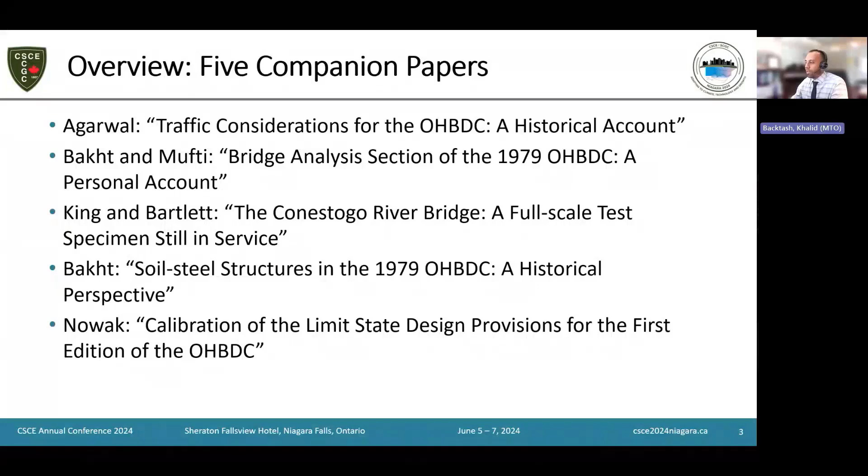Baidar Bakht is going to talk a bit about the development of the new provisions for soil steel structures in the code, and then Andy Nowak will detail the calibration of the new limit states design provision that was incorporated into the code.

Any discussion of the Ontario Highway Bridge Design Code should start with a brief description of its key proponents: Paul Csagoly and Roger Dorton, both Ontario Ministry of Transportation and Communication engineers, who served as chair and vice chair respectively of the Code Control Committee.

We were unable to find a photograph of Paul Csagoly. He came to Canada during the Hungarian uprising against the Soviet occupation in 1956 and led the MTC Structures Research Group until 1979. He eventually joined the Florida Department of Transportation and played a major role in writing AASHTO's first limit states design code, published in 1994.

Dr. Roger A. Dorton earned his bachelor and PhD degrees from the University of Nottingham. He immigrated to Canada in 1954, meeting his future wife on the transatlantic crossing. He joined P.L. Pratley's firm in Montreal, redesigning the steel cantilevers of the Champlain Bridge in Montreal, and after Pratley's death, designed the Murray MacKay Bridge across the Narrows at Halifax.

He joined the Ministry's Engineering Research and Development branch in 1972 and was promoted in 1976 to manager of the MTO Bridge Office, where he headed the development of the 3 editions of the Ontario Highway Bridge Design Code. In 1993, he returned to private consulting as head of the Ontario office of Buckland and Taylor Limited. Dr. Dorton's autobiography spanning the years is the source of a lot of what's being presented in this paper.

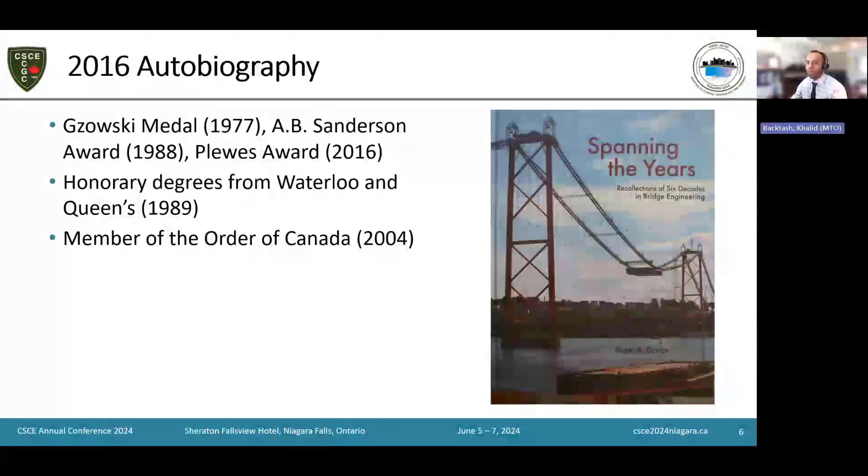As Chris alluded to earlier, Dr. Dorton identifies a perfect storm of circumstances in the mid-1970s that justified the development of a new bridge code for Ontario. There were shortcomings of the 1973 AASHTO standard specifications that were evident. The 72,000 pound, or 320 kilonewton, AASHTO design truck had roughly half the weight of the maximum truck weight permitted in Ontario, which was 140,000 pounds or 615 kilonewtons.

Moreover, the AASHTO and CSA S6 standards did not have commentaries. The procedures for revising AASHTO required support from all 50 states, which would have been challenging to receive. The metric system was being adopted in Canada, but AASHTO had no plans to metricate. The early 1970s also saw the dawn of limit states design in Canada, and the creation of a limit states design code would allow proper calibration to be conducted.

Finally, the ministry was spending $250,000 a year on research and was making significant inroads concerning a new live load model, load factor design, dynamic analysis, and deck design considering membrane forces. Practitioners were unlikely to take advantage of these new findings unless all of these provisions were permitted by a formal design code.

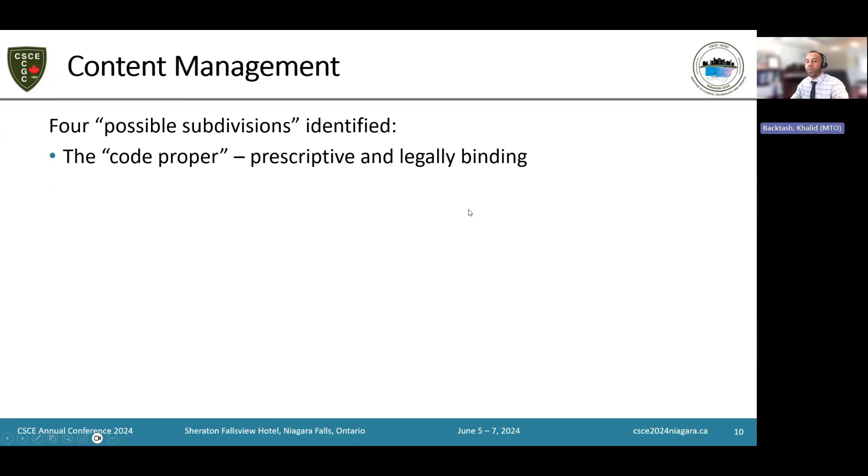4 possible categories of content were identified: the code proper, which was prescriptive and legally binding; charts or diagrams in appendices, legally binding; a commentary published with the code but not legally binding; and then a supplement of background data of research information published with the code but not legally binding.

The first edition of the OHBDC was used to design new bridges owned by the province of Ontario. Practitioners at the time observed that its use increased design time by 30%.

The second edition was issued in 1983 and made mandatory for the design and evaluation of all bridges in 1984. The third edition was issued in 1993. Then the first edition of the Canadian Highway Bridge Design Code, based on the 93 edition of the OHBDC, with existing bridge evaluation provisions from previous editions of CSA S6, was introduced.

The Code Control Committee was chaired by Paul Csagoly with Roger Dorton as vice chair. Here I will highlight some of those Code Control Committee members.

Chris G. Bassey was an engineer at the MTC Bridge Office and also chaired the Pre-Stressed Concrete Subcommittee. Barrington deV. Batchelor taught civil engineering at Queen's and chaired the Deck Slab Subcommittee. Jacques Bouchamp was director of Bridge Engineering for Public Works Canada. Chester Grebsky was an MTC engineer who also chaired the General Features of Design Subcommittee.

Roger Green taught civil engineering at Waterloo and chaired the Dynamic Loads and Vibration Subcommittee. DJ Laurie Kennedy taught at the University of Alberta and chaired the Steel Design Subcommittee. Kenneth Kleinbasser was an MTC engineer who chaired the Evaluation of Existing Bridges Subcommittee. Brian Richardson was an MTC engineer who led the Miscellaneous Loads and Movements Subcommittee, and Ronald A. Temple was also a member of the Code Control Committee.

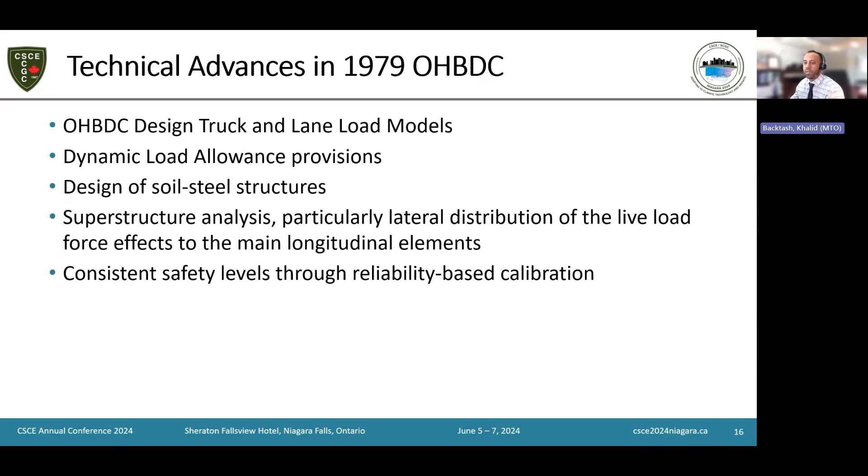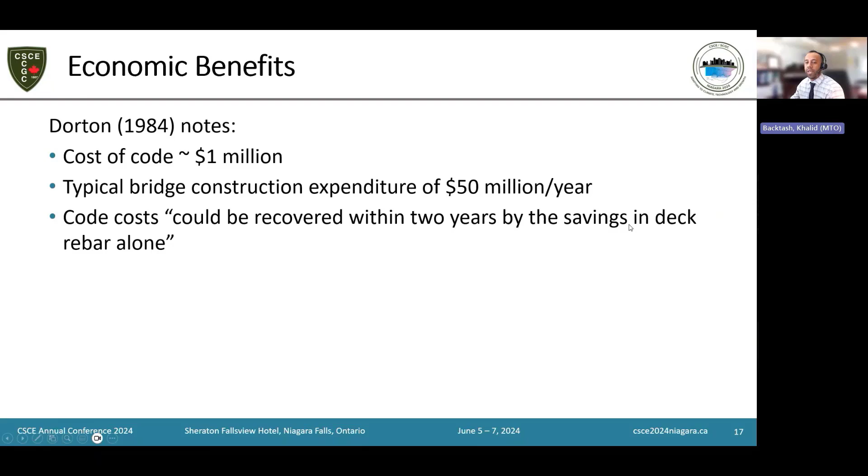In 1984, in a paper, Roger Dorton notes that the cost of developing the code at the time the second edition became mandatory in 1984 was about $1 million. He also estimated that given typical bridge construction expenditure at the time was about $50 million per year, the code could have recovered the cost being spent in about 2 years in savings in deck rebar alone.

He also concludes that perhaps the largest financial benefit, however, is in the area of bridge evaluation, where the new code will enable many bridges to be saved and renovated that would have been replaced at greater expense under the old code provisions. The other major benefit, difficult to measure in financial terms, is the provision of bridges of a much more consistent and well-defined safety level, capable of carrying design live loads twice those previously described. That's all for the brief introduction.

Our next speaker is Akhilesh Agarwal, who retired from a long career as principal research engineer with the MTO's Research and Development Branch. Akhilesh chaired the Dead and Live Loads and Load Factor Subcommittee, responsible for Section 3 of the 1979 Ontario Highway Bridge Design Code. He subsequently served as the first chair of the Calibration Task Force of the Canadian Highway Bridge Design Code. His expertise in traffic load modeling and bridge evaluation has had a lasting impact on transportation infrastructure across the country. His presentation is on Traffic Considerations for OHBDC, a Historical Account.

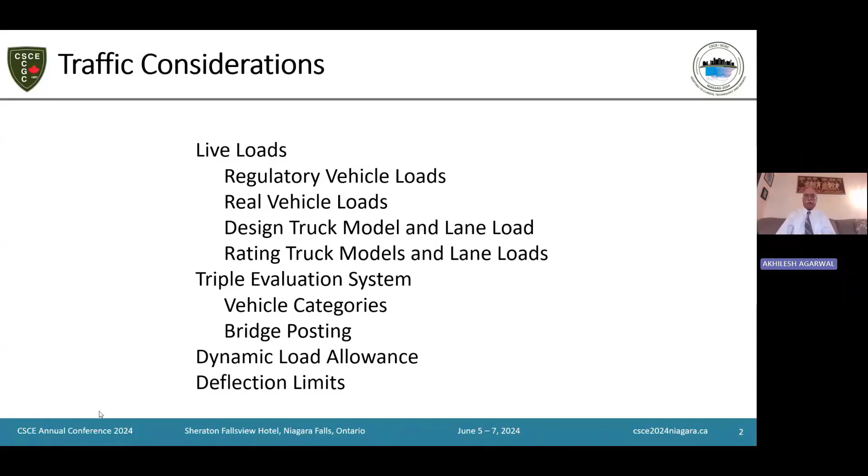Regulatory loads are determined on the basis of capacity of the highway and such infrastructure, with appropriate margin of safety to accommodate occasional overloads. Real vehicle loads can be established through province-wide load surveys. The design truck model, lane load, and evaluation loads are developed based on the real loads that go on the roads. A triple evaluation system addresses three different categories of vehicles and corresponding bridge posting loads. Traffic considerations also go into dynamic load allowance and deflection limits.

This is a story of the time when we had no personal computers. The bridges were evaluated and designed using hand calculations with a calculator. In hand calculations, it's quite difficult to analyze for a moving set of point loads, a moving set of axle loads, or a moving truck on a variety of different bridges.

But it's a lot easier to analyze bridges for uniform distributed loads. So in Ontario, vehicle trains were introduced in 1965, but they were not addressed in the AASHTO code that was in use in Ontario at that time. So when we were asked what kind of load should be allowed in these vehicle trains, to analyze a variety of bridges and a variety of bridge configurations for a variety of truckloads was almost an impossible exercise.

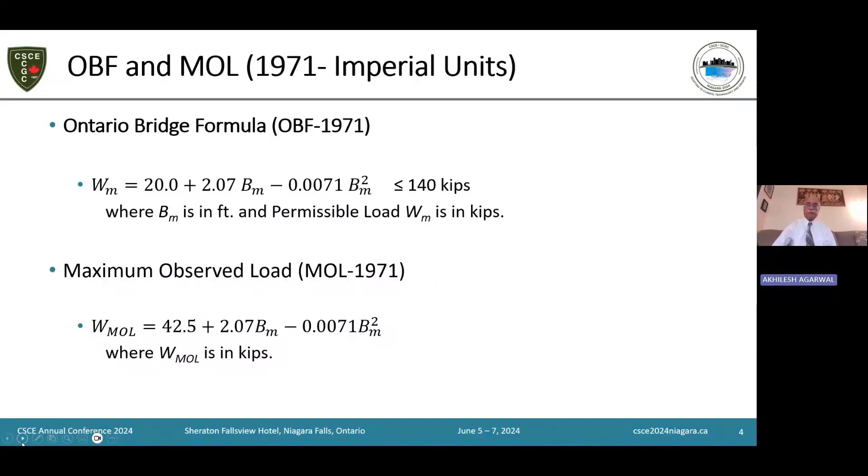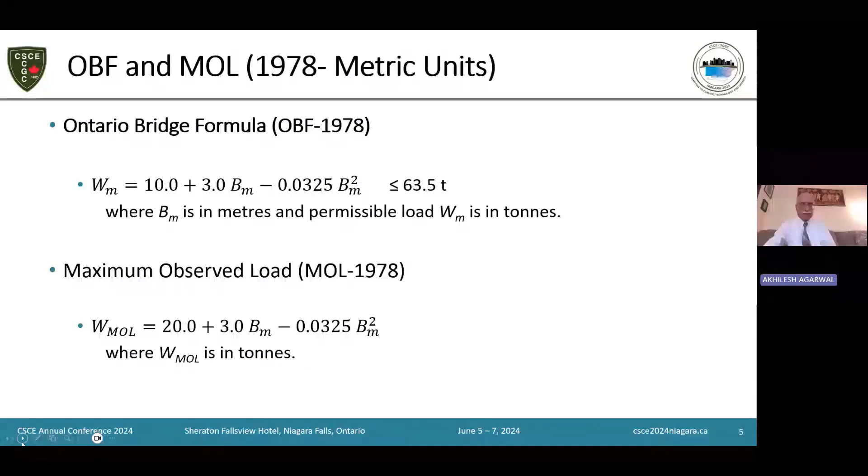In 1978, the metric system came to Ontario. The pavement engineers agreed to increase the allowable load on a single axle to 10 metric tons. The Ontario bridge formula was modified, and assuming that the nature of overload would remain similar after metrication, the maximum observed load level was obtained by adding 10 metric tons to the Ontario bridge formula. Another survey was conducted in 1975, which further confirmed the maximum observed load level. The survey also indicated that vehicles can be divided into three categories: Category 1 for single unit vehicles, also known as straight trucks in the industry, Category 2 tractor trailers or tractor semi-trailers, and Category 3 trains.

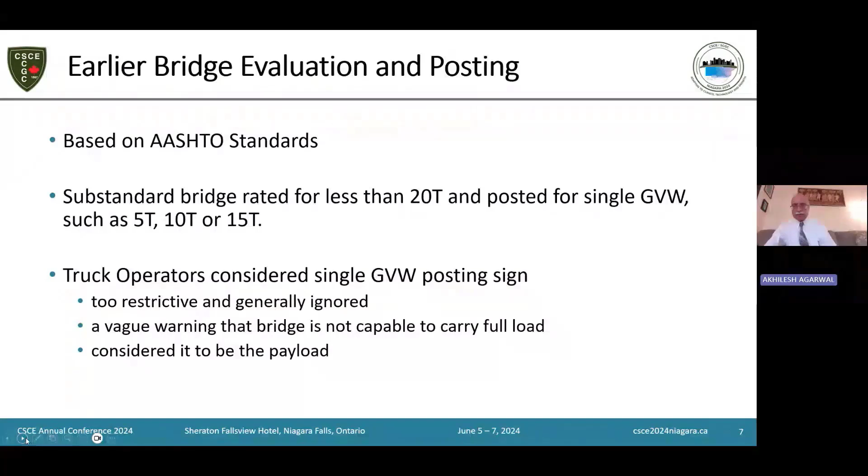Earlier bridge evaluations in Ontario were based on AASHTO standards, and according to this evaluation process, substandard bridges were rated for less than 20 tons, and they were posted for a single gross vehicle weight, such as 5 tons, 10 tons, or 15 tons, at the bridge site. Truck operators considered these signs to be too restrictive, and they generally ignored them. We ourselves have observed some 40-ton trucks crossing a bridge with a 5-ton sign on it. The truck operators also felt that they were just a vague warning that the bridge is not capable of carrying full load. And some even considered that it was not the gross weight of the vehicle, but the payload, the amount of load that is put on the empty truck. So there was wide confusion, and the signs were ignored quite frequently.

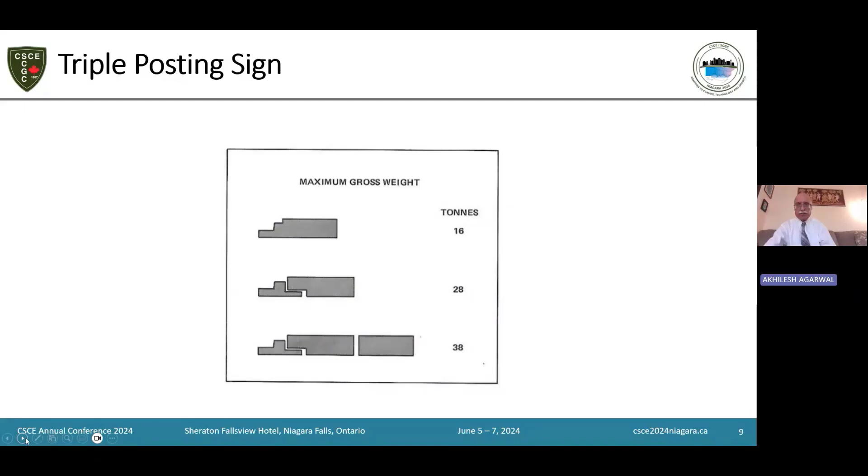So we decided that bridges need to be evaluated for each vehicle category separately, and that a substandard bridge should be posted with a gross weight limit for each vehicle category. For this, we now needed live load models for each vehicle category. The triple posting sign, which you can see today on a lot of bridges, shows 3 different categories of vehicle and the maximum allowable load on each category.

It was decided to develop a loading model such that its subconfigurations could be used for evaluation loads. And that led to this OHBD 5-axle truck, in which axles 2 and 3 represent a dual or triple axle unit. The first 3 axles would represent category 1 vehicles, the 4 axles would represent category 2 vehicles, and the full OHBD truck would represent category 3 vehicles.

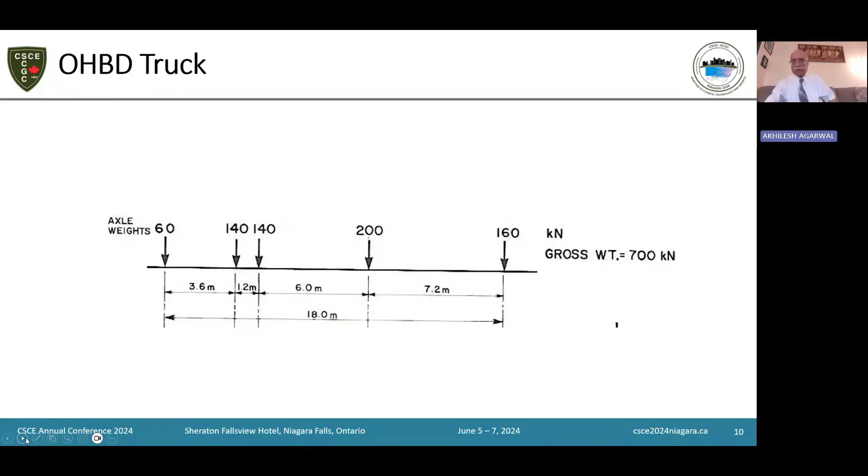To represent the other miscellaneous traffic, a lane load was developed, in which other miscellaneous traffic was represented by a uniform distributed load. The intensity of this load depended upon the highway class, A with the higher volume classes and B and C with the lower volume classes.

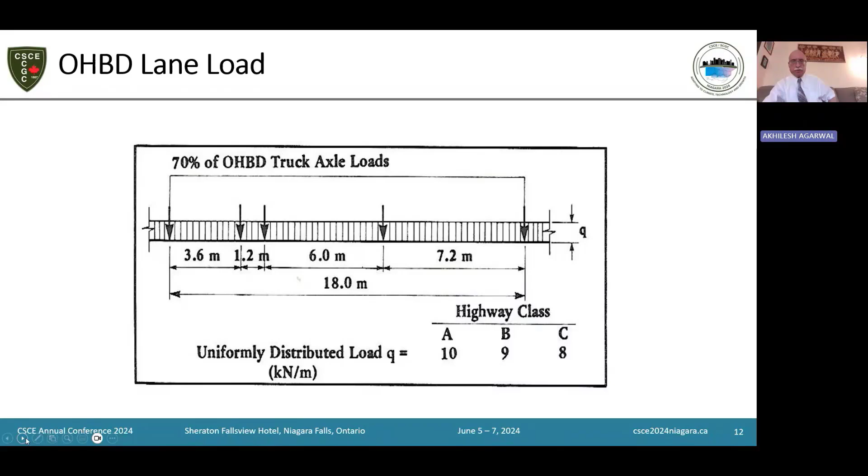For design convenience, the uniform distributed load was placed on the entire length, and therefore it was overlapping over the truck. To compensate for that, the truck loads were reduced to 70% of the OHBD truck axle loads.

For evaluation purposes, the Ontario Highway rating trucks for 3 categories were, as I mentioned earlier, the first 3 axles of the OHBD truck made the evaluation level 1 load, 4 axles made evaluation level 2 load, and the full OHBD truck made the evaluation level 3 load. There were corresponding lane loads, again in a similar way as design.

Coming to dynamic loads, prior to the Ontario Bridge Code, there was a general feeling that you don't have any resonance with the vehicle loads on the bridges. But this all changed in 1972, when we were out to test a bridge in St. Jacobs, Ontario. It is in the middle of the town. We went there to do the punching shear test on the bridge.

And as we were preparing for the testing, instrumenting the bridge and all that, I walked on the walkway on the outside of the truss, just to have a look at the truss condition. And when I was around the middle of the span, suddenly the bridge started shaking very badly. And I just could not understand why it was shaking so badly. I looked and there was only a horse buggy on the bridge at that time.

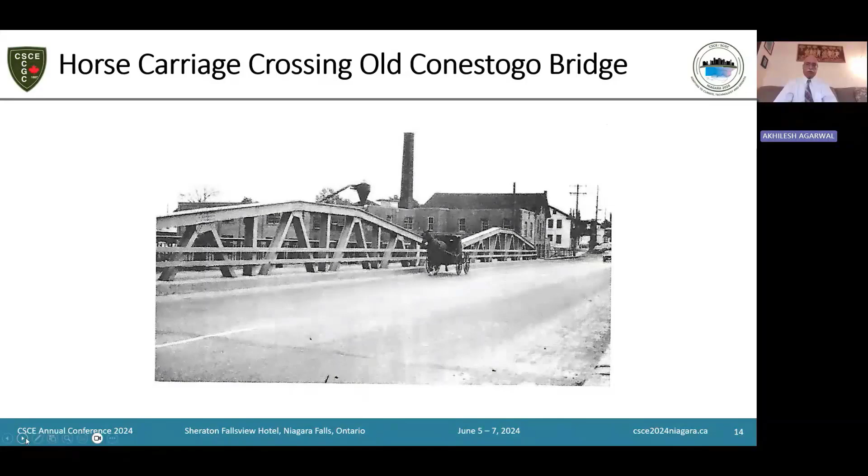So we instrumented the bridge to measure dynamic deflections at mid-span. We measured the dynamic deflection under a heavy truck, and what we found was that the dynamic deflection under a lightweight horse buggy was almost as large as under a heavy truck. The frequency of the horse's hooves was around 3 hertz. So we concluded that there was some kind of a resonance situation developing between the horse buggy and the bridge. The resonance frequency may be close to 3 hertz.

So we later on selected a number of bridges. And first we got some data from industry. We found that the natural frequency of the springs for trucks is generally from 2.5 to 5 hertz. So we selected a number of bridges which had natural frequencies in the range of 2.5 to 5 hertz and carried out extensive dynamic deflection measurements. And from that, we determined the dynamic load due to normal traffic.

And we found that, generally speaking, the impact values in those bridges were a lot higher than what the code was providing. For bridges outside this range, we found that the impact value was quite low. This gave us an idea that in order to avoid high dynamic loads, it's preferable to design new bridges outside the natural frequency range of 2 to 5. But if there are bridges between 2 and 5, they should be designed for a higher dynamic load allowance.

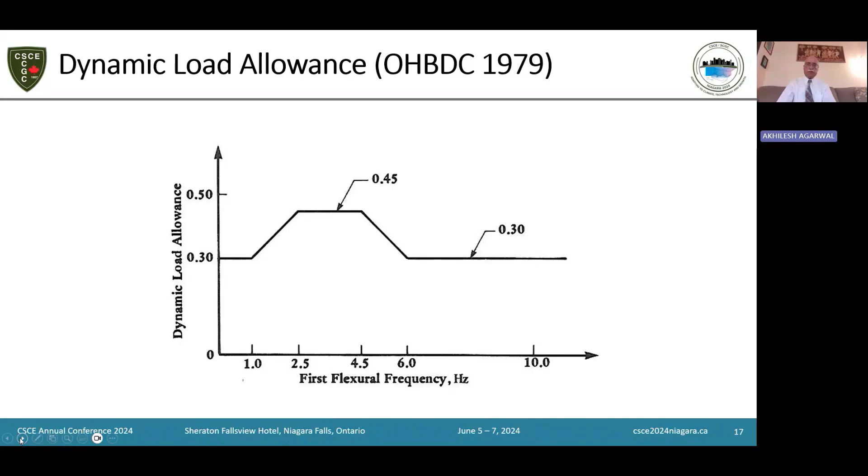That led to this provision in the Ontario Highway Bridge Design Code, where for bridges with natural frequency less than 1 and more than 6, it is 0.3. For 2.5 to 4.5, the dynamic load allowance is 0.45, gradually reducing to 0.3 on both sides. This became part of the dynamic load allowance in the Ontario Highway Bridge Design Code.

Traffic considerations also were considered for deflection limits. In AASHTO, they were empirical deflection limits, but we rationalized them on the basis of human perception of bridge vibrations. People who are traveling in vehicles don't experience any bridge vibration. But people who are walking on the bridge feel somewhat less bridge vibration compared to people who would be sitting on the bridge. And this led to 3 different conditions for the deflection limits.

For bridges without sidewalks, such as expressways, where you may have only occasional maintenance people on the bridge to experience bridge vibrations. Then bridges with somewhat less pedestrian use, and then bridges with significant pedestrian use, such as with sidewalks within towns or cities. That led to this chart of all the deflection limits, which became part of the Ontario Highway Bridge Design Code.

Subsequently, the dynamic load allowance has been changed in the further editions of the Ontario Bridge Design Code and into the CHBDC. Also, the load model for the Canadian Highway Bridge Design Code subsequently has been developed not at the maximum axle load, but at the regulatory load limit for interprovincial transportation, which is commonly known as Council of Ministers loading.

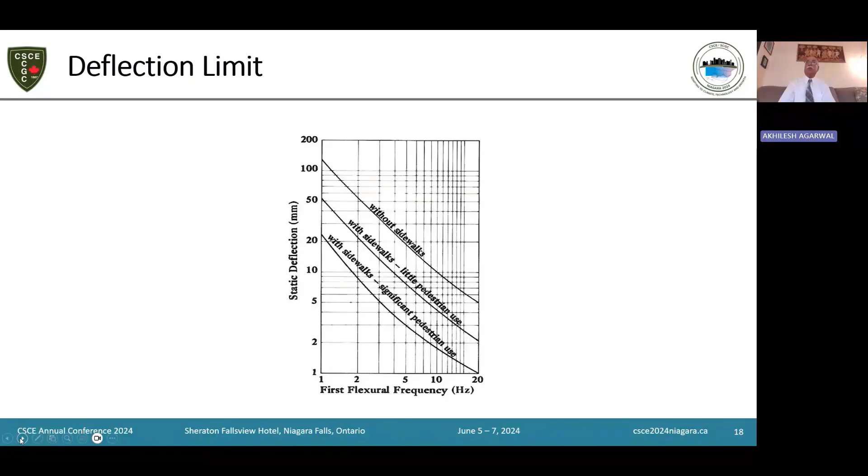Thank you. Our third speaker is Baidar Bakht, who also retired from a long career as principal research engineer with the MTO's Research and Development branch. Baidar worked extensively with Leslie G. Jaeger, chair of the Section 5 Subcommittee on Static Analysis of Bridge Superstructures of the OHBDC First Edition. He subsequently won the Ontario Professional Engineers Engineering Medal in 1997.

In 2014, he was appointed a member of the Order of Canada for his contributions to civil engineering and cultural enrichment through Urdu and Hindi poetry. Baidar's presentation is titled Bridge Analysis Section of the 1979 OHBDC, A Personal Account.

I would like to relate my experience to the analysis section of the OHBDC through a personal account that I'm going to recount with my friend Aftab Mufti, who is an emeritus professor at the University of Manitoba, now living in BC. I was in England from 1966 to 1973, working with the Ministry of Transportation of UK. And I also did my master's at the Imperial College.

I learned that bridge superstructures were analyzed for transverse load distribution by either manual or computer-based methods. The computer-based methods were grillage analogy, finite element method, orthotropic plate method, and the manual methods were distribution coefficient methods developed by Guyon and Massonnet and adopted by Cement and Concrete Association. There were also methods developed by Cusens and Pama.

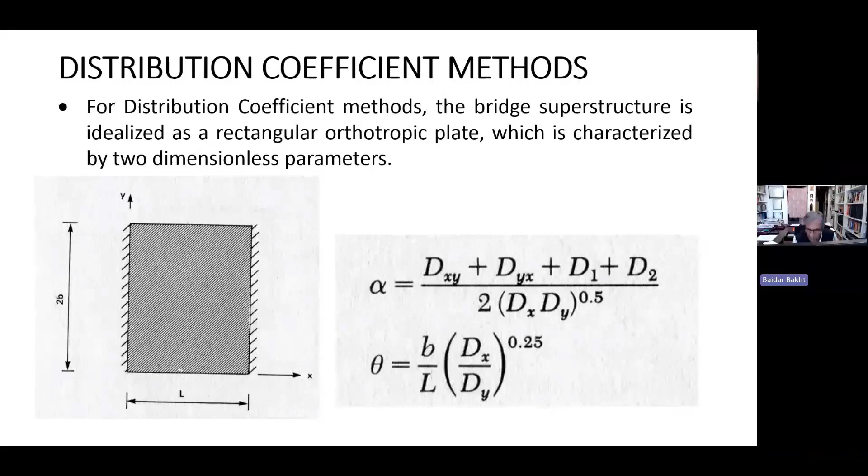For distribution coefficient methods, the bridge structure is idealized as a rectangular orthotropic plate, and it is characterized by two very important dimensionless parameters, alpha and theta. Alpha relates the torsional rigidities Dxy, Dyx, D1 and D2 with the flexural rigidities of the bridge, and theta relates the longitudinal flexural rigidity, which is Dx, with the transverse flexural rigidity of the bridge along with its aspect ratio, which is half width of the bridge b and the span of the bridge. They are very important characterizing parameters.

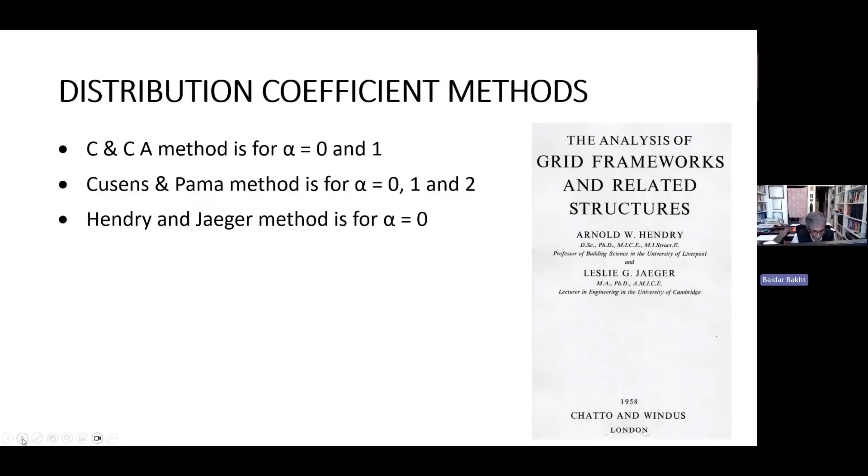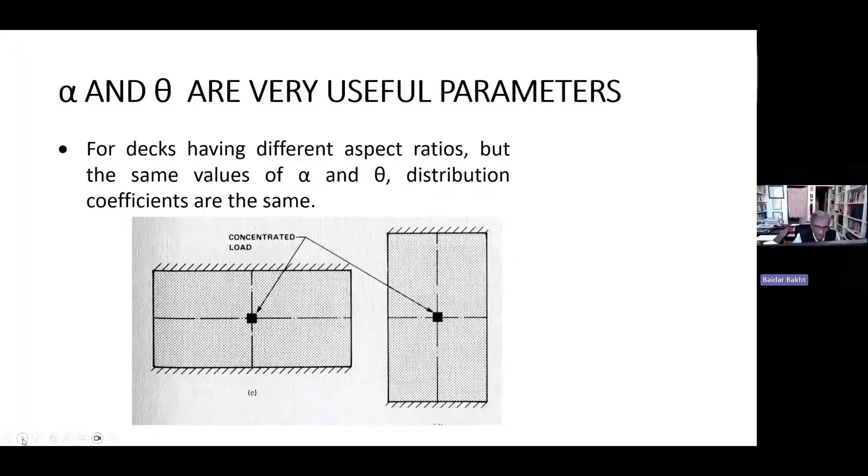Now, alpha and theta are very useful parameters. If you take two rectangular orthotropic plates, one is twice as wide as the other, but have the same values of alpha and theta, the distribution coefficients across any transverse cross-section will be exactly the same. Now, alpha and theta are very useful in that theta for all bridges in the world goes from nearly 0 to 2.5. Now, alpha goes from nearly 0 to 2.

Alpha from nearly 0 to nearly 0.02 has bridges with very little torsional rigidities, and these are timber bridges. Slab and girder bridges have alpha nearly equal to 0.1. Slab bridges have alpha equal to 1, and box girder bridges, in which the torsional rigidity is very large, have alpha between 1.5 and 2.

In 1973, I came to Canada and joined the Ministry of Transportation and Communication and found that bridges are analyzed only as beams by a very simple method of analysis. What you do is, if you have a girder bridge, you isolate one girder of the bridge, subject it to 1/2 of the design truck multiplied by S over D, where S is the girder spacing and D for steel girder bridges is 5.5 feet.

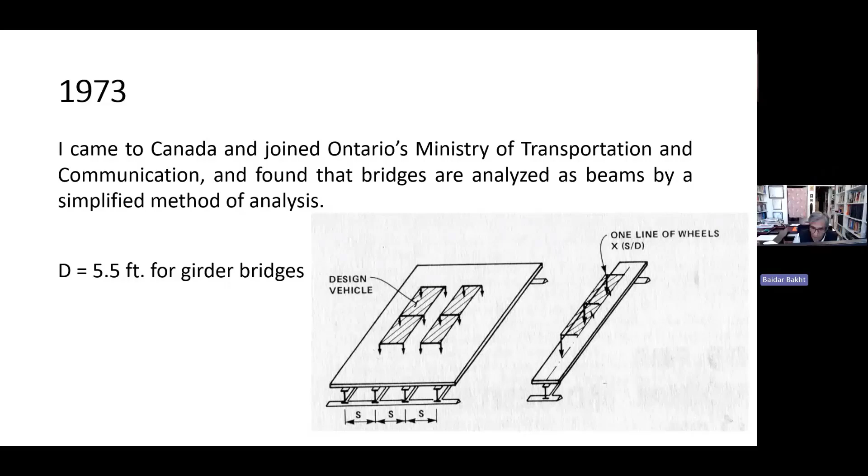That was very simple. So it was a huge change for me for analysis of bridges from the complex methods used in the UK and rest of Europe to very simple methods used in Canada and USA. The OHBDC was launched in 1976, and it was the first bridge design code in the world which had a method of analysis. Leslie Jaeger of the Hendry and Jaeger method, he was a professor at McGill University.

He was invited to chair this section. Now, I had read Leslie Jaeger's book, besides the one I showed you on Cartesian tensors in engineering science, and theory of elastic plates, and I was an admirer of his work.

In 1976, Leslie Jaeger moved from McGill to Acadia University, where he was the vice president, and I met his friend Aftab Mufti, who was the head of computer science at Acadia University. Aftab was not a member of the OHBDC, but he contributed indirectly to the analysis section. The three of us, Les Jaeger, Aftab Mufti, and I, did a lot of work on methods of analysis.

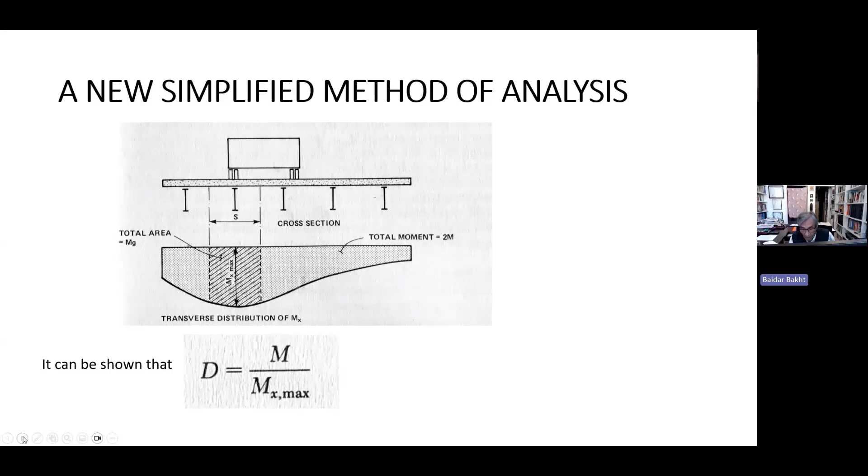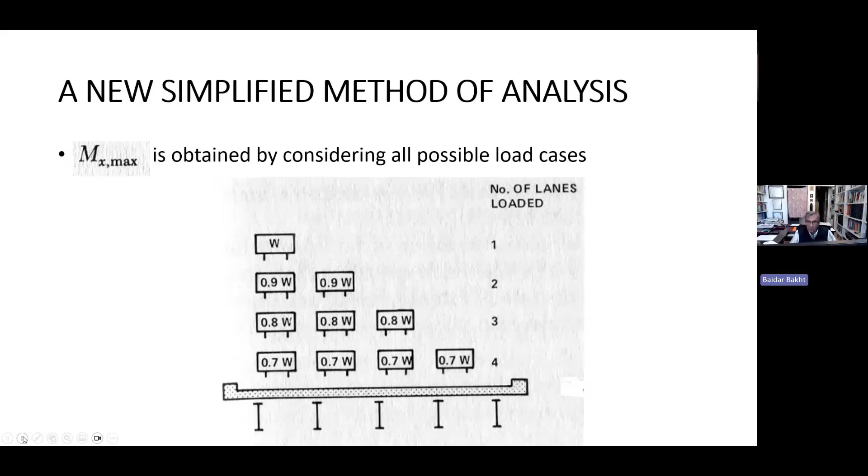For any bridge, we can calculate the value of D and then use the AASHTO method for analyzing the bridge as a one-dimensional beam. We took, for example, a 4-girder bridge, which had 4 load cases. We analyzed this bridge under all 4 load cases, multiplying the weight by the modification factor, which was 0.9 for 2 vehicles, 0.7 for 4 vehicles, calculated the value of mx max for each, calculated the D value for each, and then we used that alpha theta space for plotting the values of D for bridges with different number of lanes.

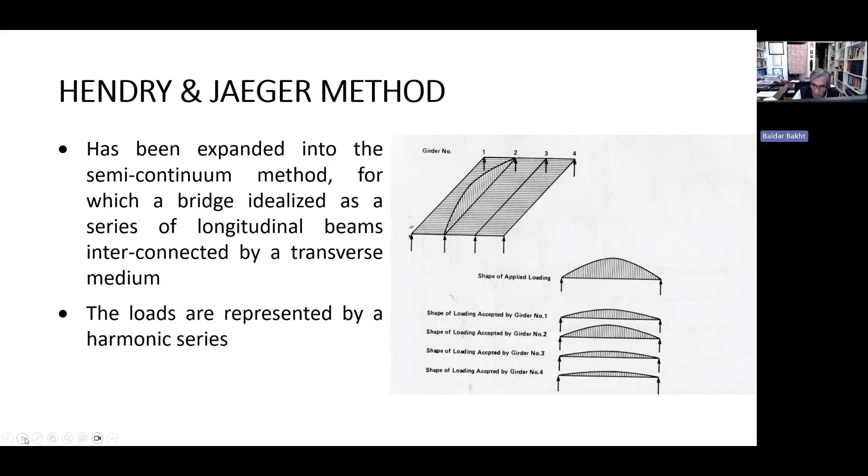But if you have the first harmonic of any loading, it looks like a half sine curve. And the beauty of that loading is that if you apply that loading to any girder of a bridge, all the other girders receive the same shape of loading. So it's very easy to calculate the distribution coefficient for a loading represented by harmonics.

Hendry and Jaeger had analyzed bridges with zero torsional rigidity, which means alpha is equal to 0, because in those pre-computer days, it was not feasible to include the torsional rigidities and have a very large number of equations. When Leslie Jaeger met me, the computers had come in vogue, and we revived the semi-continuum method by taking into account the torsional rigidities in both the longitudinal and transverse directions. The method is incorporated in a computer program called SECAN and is detailed in this book, which was also published by McGraw-Hill in 1989.

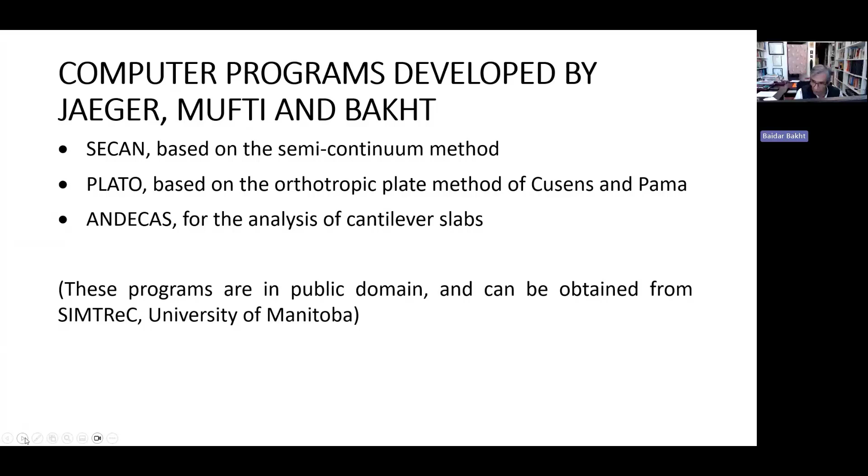Leslie Jaeger, Aftab Mufti, and I have written 3 major programs. One is SECAN, which is based on the semi-continuum analysis, PLATO, which is based on the orthotropic plate method of Cusens and Pama, and ANDECAS, which is for the analysis of cantilever slabs of slab and girder bridges. These 3 programs are in the public domain and can be obtained from SIMTReC, University of Manitoba. Leslie Gordon Jaeger passed away in 2013. He's the only fellow that I know who has 2 earned doctorates and 2 honorary doctorates.

I miss him very much, and we had a very good career doing research together.

Thank you very much. Our fourth speaker is Mike Bartlett, Professor Emeritus of Structural Engineering at Western and the immediate past chair of the CSCE National History Committee. Mike led the initiative to have the Conestoga River Bridge near St. Jacobs designated as a CSCE National Historic Site. The graduate students he has supervised at Western have largely done highway bridge-related research, primarily on the assessment and rehabilitation of existing bridges, and he has won CSCE's Pratley Award 5 times. He will be speaking on the Conestoga River Bridge, a full-scale test specimen still in service.

Good morning. I'd like to start by warmly acknowledging my co-author, Peter King, of Western's Boundary Layer Wind Tunnel. My presentation is basically 5 pieces. We'll start with an introduction and a little bit of background on the need for the bridge. We'll review the design and construction of the bridge and the research conducted using the bridge. And finally, reflect upon the historical significance of the bridge.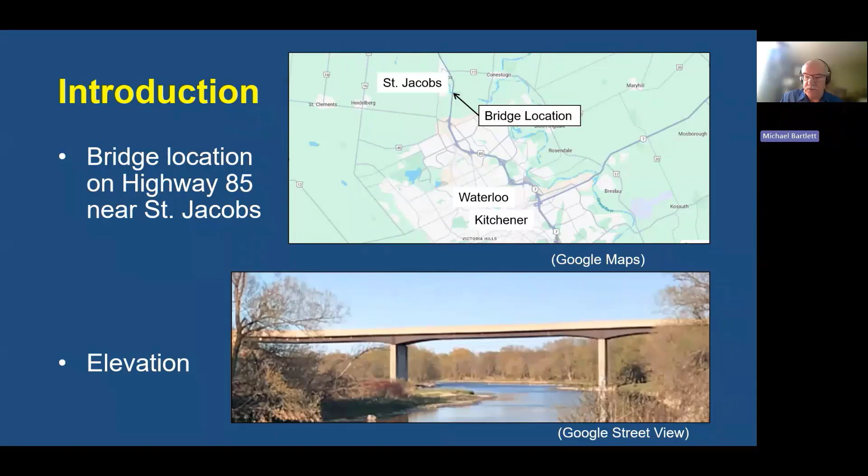The bridge represents the culmination of intensive research activity by the Engineering Research and Development Branch, ERDB, of the Ontario Ministry of Transportation and Communications. According to Roger Dorton, the group was, quote, small but had a surprisingly large number of significant projects underway.

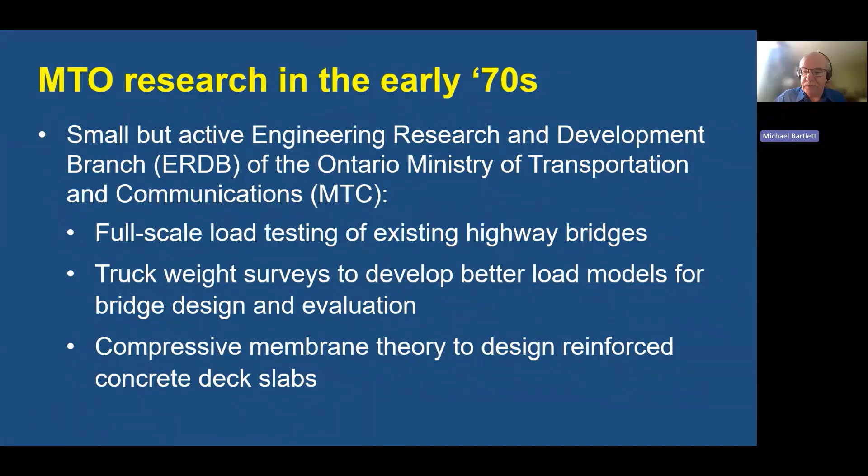Its activities included checking the load-carrying capacities of bridges thought to be deficient using full-scale load testing, carrying out truck weight surveys, Akilish has talked about them already, to develop more accurate truckload models for bridge design and evaluation, and investigating the application of compressive membrane theory to design reinforced concrete deck slabs that require a fraction of the reinforcement needed for conventional designs of the day. Khaled reminded us of Roger Dorton's observation that the cost of developing the OHBDC was saved with the savings of 2 years in deck reinforcement.

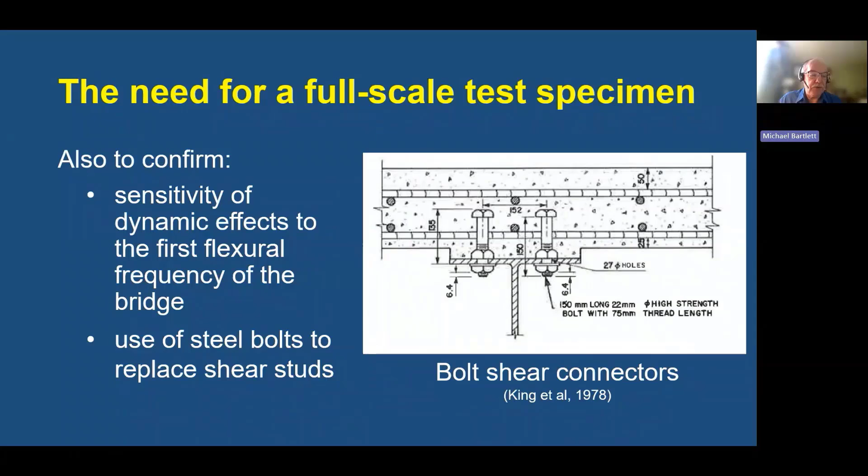They recognized that they needed a full-scale test specimen to confirm their findings and also to confirm the dynamic effects of the traffic loads being sensitive to the first flexural frequency of the bridge. Again, Akilish has talked about the buggy crossing the Conestogo River Bridge. And to verify that steel bolts could be used to replace shear studs to achieve fully composite behavior of steel-concrete bridge superstructures.

Roger Dorton's autobiography celebrates the support received from the ministry's senior bureaucrats. Quote, the senior management became very interested in the Conestogo River Bridge project, and rightly so, as they would be held responsible for the opening for public use of a bridge with many innovations that was not designed to the accepted code. Without this high-level support, Dorton says, this unusual project would never have been realized. They showed a forward-looking acceptance of risk and change, characteristics not always associated by the public with civil servants.

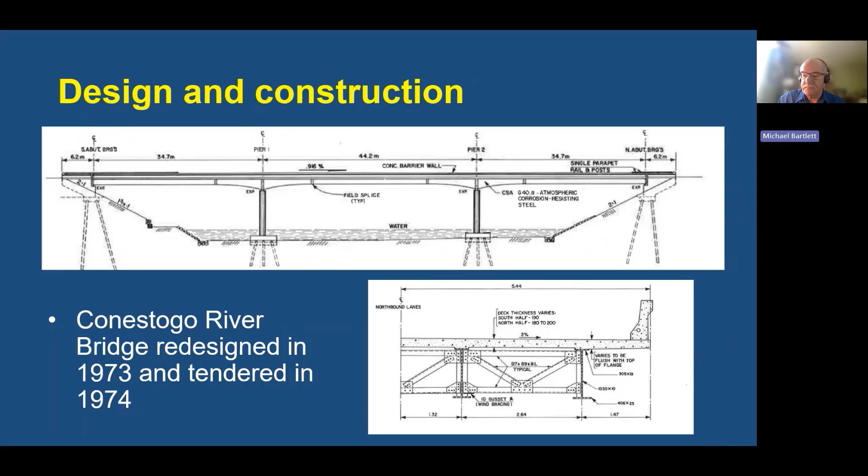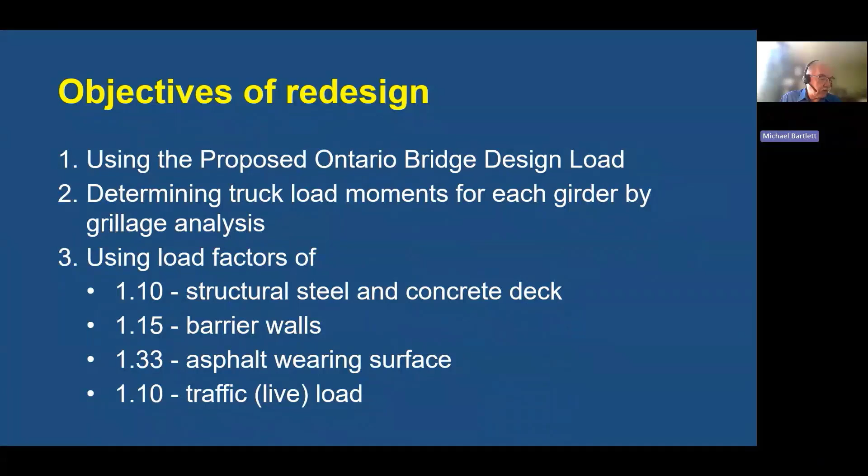The redesign had several objectives. First, to use a new load model, the proposed Ontario Bridge Design Load, proposed by Csagoly and Dorton in 1973, determining the fractions of truckload moments carried by each girder by a computerized grillage analysis that yielded much smaller girder demands compared to those obtained using the AASHTO 1973 specifications. Using distinct dead load factors of 1.1 for the structural steel and the concrete deck, 1.15 for the barrier walls, 1.33 for the asphalt wearing surface, and a very low live load factor of 1.1 because the specified proposed Ontario Bridge Design Load represented an upper bound vehicle weight.

They eliminated any deflection limitation to allow a very shallow and flexible superstructure. It was intended that the first flexural frequency lie outside the range of 2 to 5 hertz. Akilish has told us why that's important, that it's typical of heavy truck frequencies. This would prevent resonance between the truck and the bridge and so markedly reduce the dynamic effect of the live load. They used ASTM A325 bolts as shear connectors instead of conventional welded shear studs.

They used a conventional deck slab designed to resist transverse bending by the usual AASHTO 1973 working stress method for the south half of the bridge, but they created 12 test panels at the north half with thicknesses of 180, 190, and 203 millimeters, and transverse steel percentages of 0.95%, which was the AASHTO requirement, 0.6, 0.3, and 0.2%.

And finally, they post-tensioned the deck longitudinally to satisfy allowable tensile stress limits at ultimate limit states and ensure composite behavior in the negative moment regions.

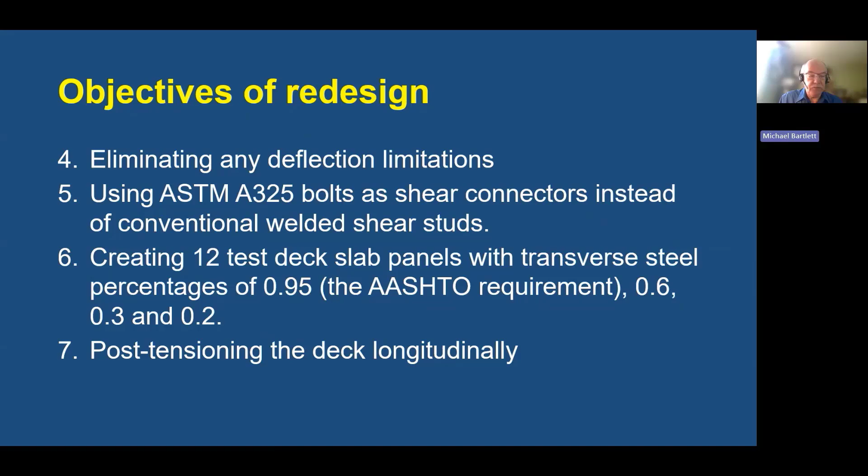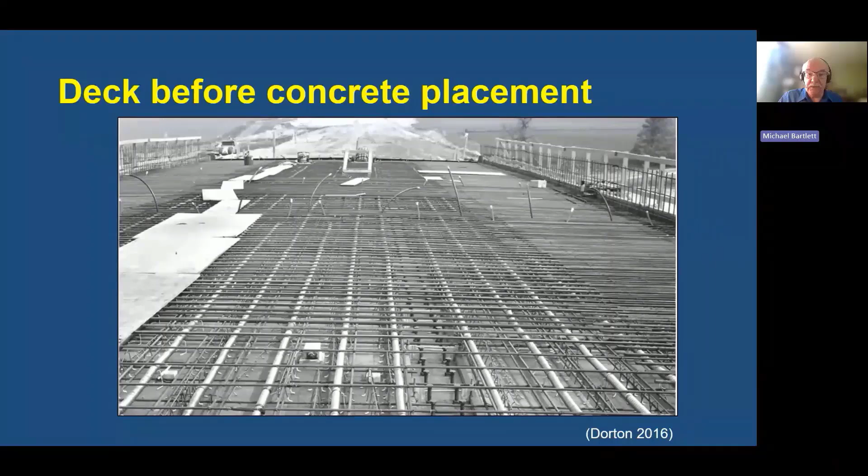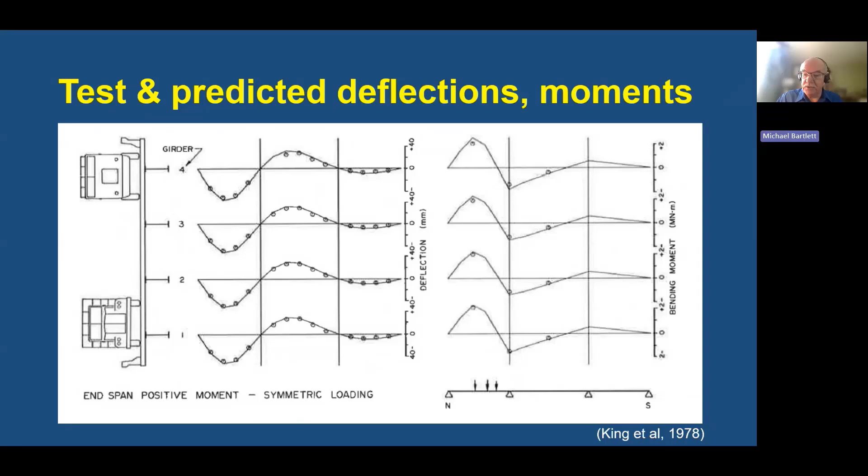This figure shows the stress distributions in the girders inferred from the strain gauge readings. In all cases, the observed location of the neutral axis corresponds closely to that computed for the fully composite section and well above that computed for the non-composite section. The bolt shear connectors are clearly effective.

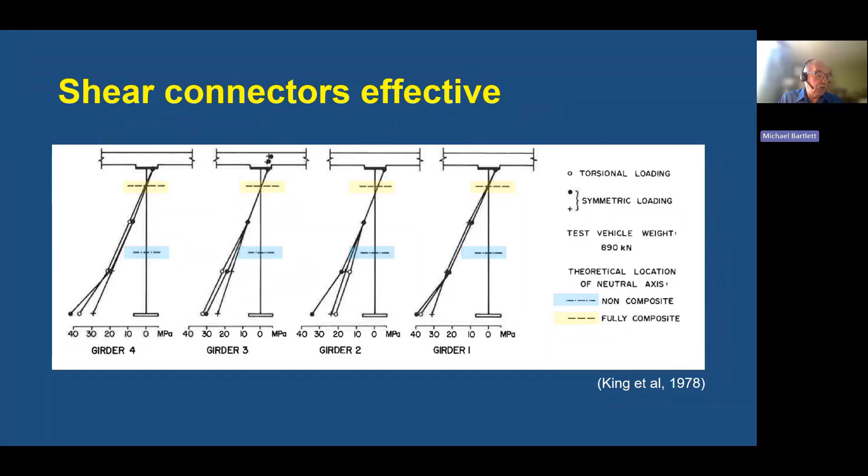The test deck sections performed very well, even though the transverse reinforcement was as low as approximately 1/5 of that required by the AASHTO 1973 provisions.

The Conestogo River Bridge is historically significant because it's novel. It's the only one that we're aware of that was designed using unpublished design standards to be used as a test specimen before being put into regular service. It's also significant because of its creators. The MTO Engineering Structures Research Branch, although small, was carrying out substantial and world-leading research that had a tremendous and lasting impact on bridge design in Canada and, as Chris pointed out, even internationally.

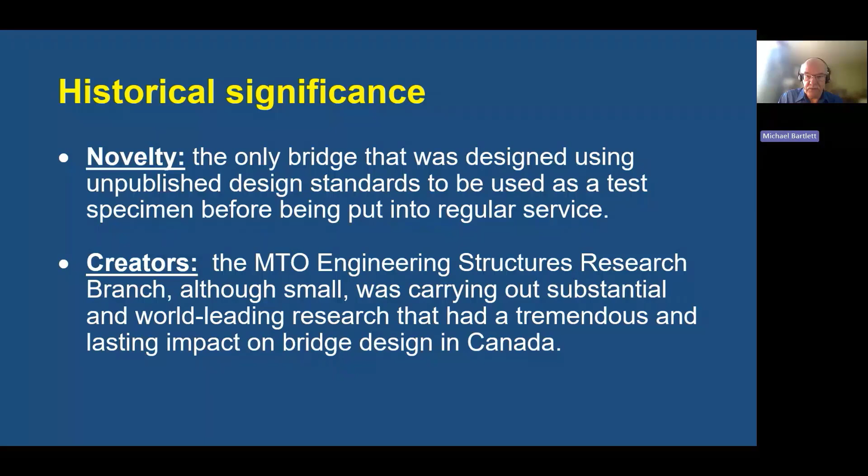Roger Dorton and Paul Csagoly, in a 1977 publication to support a CSCE national lecture tour about the development of the OHBDC, note: 'The testing of this bridge in 1975 and an evaluation of the test results has given the required backing to the concepts mentioned so that they have been advocated for inclusion in the code.'

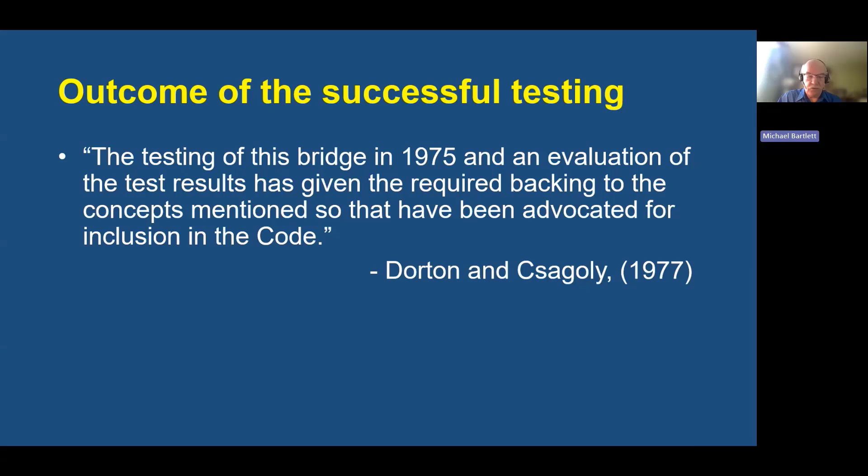The Conestogo River Bridge will be a future CSCE National Historic Site. Approval's been given, we just haven't erected a plaque there yet. We're now working with the region of Waterloo, who owns the bridge, to obtain their formal support. The wording for the plaque is as shown.

Roger A. Dorton, Paul F. Csagoly, and others working for the Ontario Ministry of Transportation and Communications Engineering Research Group designed the Conestogo River Bridge in 1974. Their design used innovative criteria developed from recent research. These criteria, validated by instrumenting and testing of the full-scale structure in 1975, addressed the dynamic response of highway bridges, the behavior of concrete deck slabs, and the lateral distribution of truckloads to the main girders. These tests provided the required confirmation so that the new methods could be included in the first edition in 1979 of the Ontario Highway Bridge Design Code, the forerunner of modern Canadian bridge design standards.

At one of our planning meetings, Baidar described the Conestogo River Bridge as 'the first bridge designed by the Ontario Highway Bridge Design Code.' Well, the live load was different, but it's still a nice way to think about it.

I'd like to again acknowledge my co-author Peter King, whose MESC thesis at Western is a comprehensive analysis of the Conestogo River Bridge test results, and Doreen, who puts up with me. That's the end of my presentation.

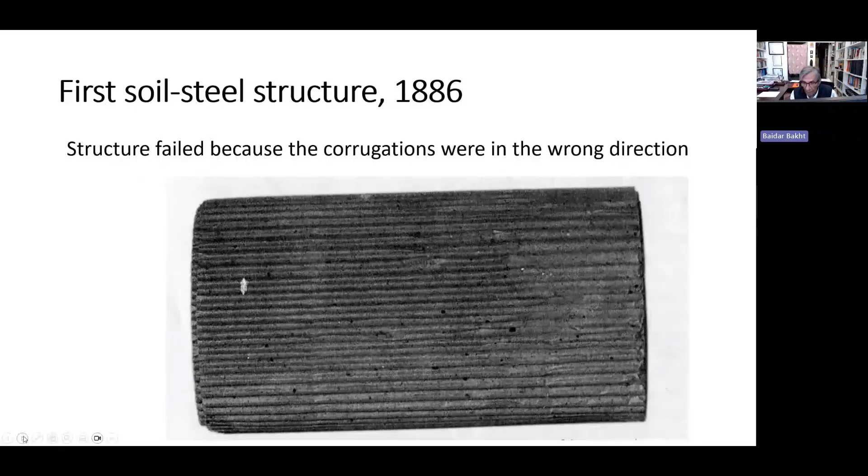Since then, tens of thousands of corrugated metal pipes have been constructed worldwide. These structures were known by different names: corrugated metal pipes, culverts, metal culverts, or whatever.

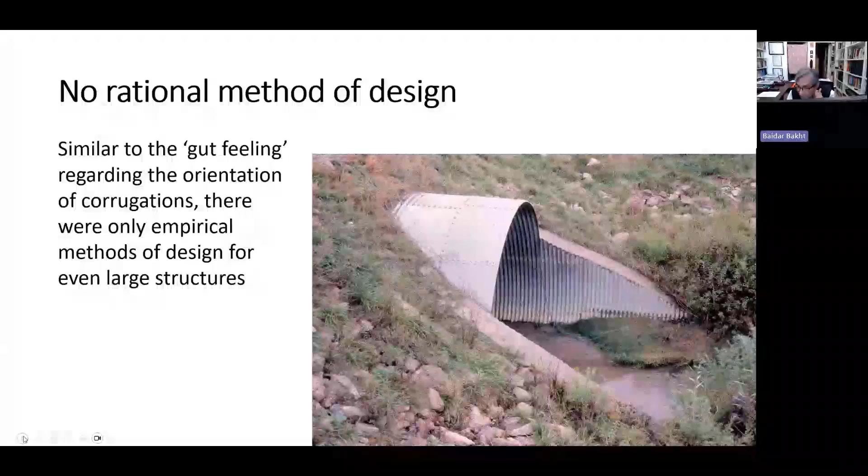Similar to the gut feeling of the conception of the structure, you will be surprised to know that these structures were also designed by gut feelings and not by a rational method. In 1976, when the Ontario Code was introduced, it had a section on soil steel bridges, and I'll tell you about the definition. I was made chair of that section, and my only claim to expertise was that I had interpreted data from an instrumented structure to say what the moments and axial thrusts were.

The real brain of that committee was George Abdel-Sayed, who had studied in 1970 in German the original work of Kloepel and Glock, and was himself conducting research in soil steel bridges at the University of Windsor. The other members of that technical subcommittee are listed here, and really none of them had a very clear idea how this structure should be designed.

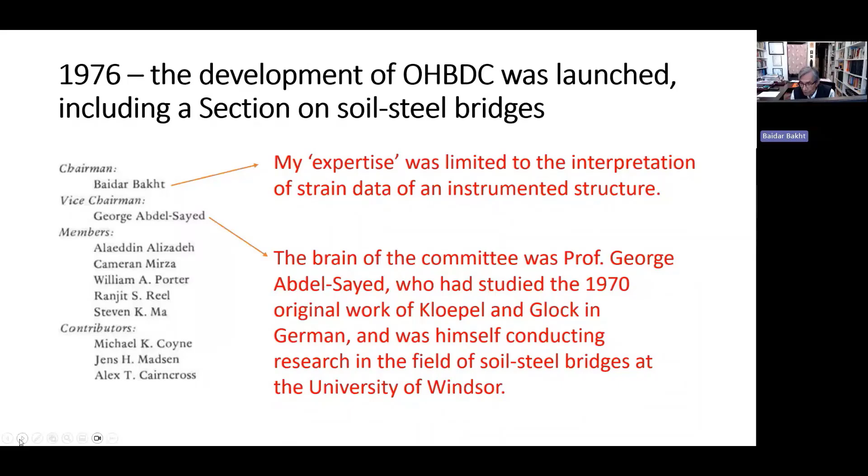We had the first meeting of the technical subcommittee, and believe you me, most of the first day was spent deciding what we should call these structures. So we eventually called them soil steel structures.

A soil steel structure, defined, is comprised of structural steel plates and engineered soil—that's important—designed and constructed to introduce a beneficial interaction between the two materials, between the corrugated metal pipe and the surrounding soil.

Now, a bridge, according to the legislation of Ontario and Canada, should have a span of more than 3 meters. So the small pipes had very small corrugations, and pipes which could be called bridges had 2-inch by 6-inch corrugations. Here you can see the 6-inch, or 152 millimeter by 51 millimeter corrugation, where the pitch is 6 inches and the depth of the corrugation is 2 inches or 51 millimeters.

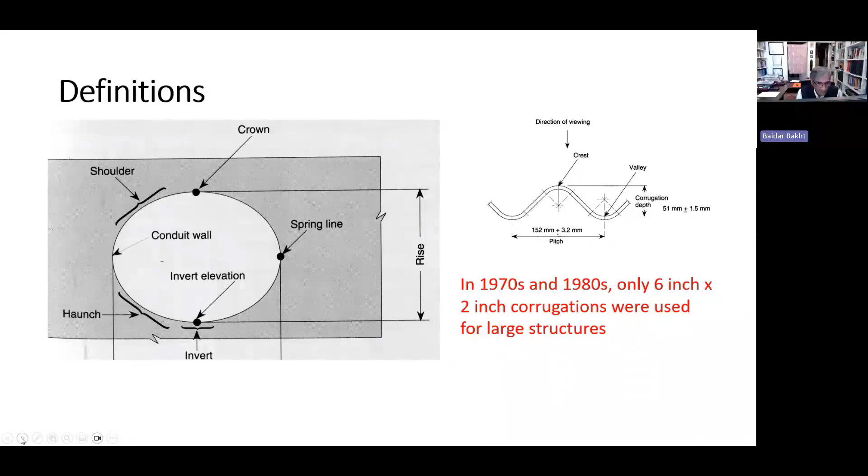How does this corrugated pipe hold the load? I invite you to think of a soup can: remove the lids, and you can compress it with your fingers very easily. This time, take that can, hold it in your hand, and squeeze it so that you apply nearly equal radial pressure around it—you will find you won't be able to bend the pipe.

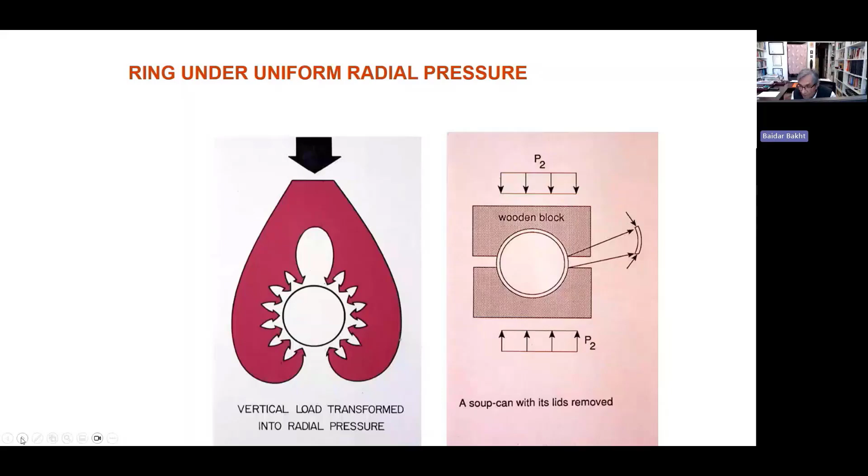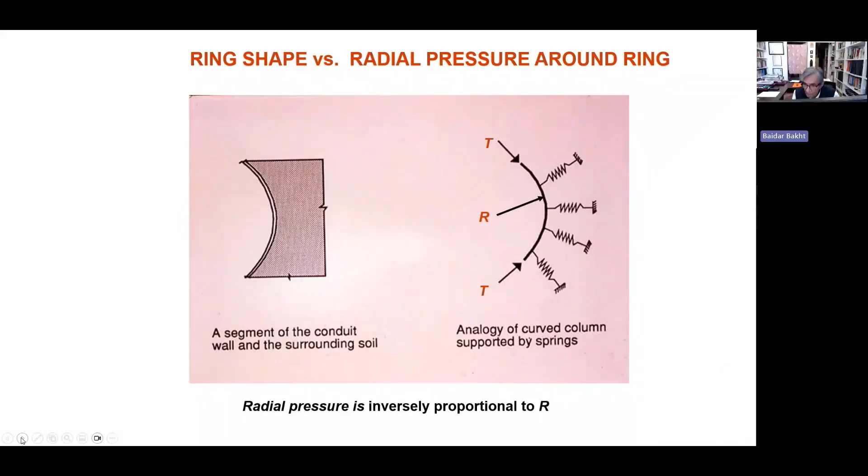I used to have two wooden blocks shaped and a soup can without the lids, and would take it to my presentations: put the lower wooden block down, put the soup can in, put the top wooden block on, and let a person stand on the top block. You can easily see that only a very small portion of the can is directly in compression. An analogy can be drawn that the pipe is really in compression, supported by spring supports given by the soil. The stronger the springs, the higher the capacity of the pipe to take thrust. Radial pressure is inversely proportional to the radius of curvature of the pipe.

We took a concrete pipe analytically and subjected it to soil load, and there were very large bending moments, as shown on the left side. Then we analyzed this pipe by putting 4 hinges, as shown in the top right-hand sketch, and we found that the bending moments disappeared.

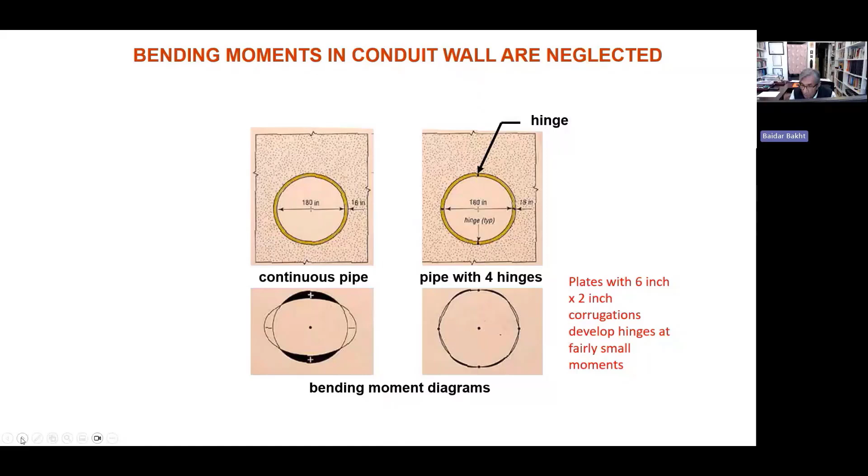The beauty of this small 6-inch by 2-inch corrugation is that it cannot hold too much bending moment. It develops invisible hinges, just like the hinges in this mathematical model. The result of forming those hinges is that bending moments disappear from the conduit wall, and the conduit wall is subjected only to radial thrust.

These soil steel bridges come in different shapes. They are round pipes, horizontally elliptical pipes which are good for vehicles, vertically elliptical pipes which are good for trains, pipe arches which are good for water going through the pipe, and pear-shaped pipes, which is roughly the reverse of a pipe arch.

The way you calculate the thrust in the conduit wall is you calculate W, the weight of the soil directly above the conduit, and multiply it by AF, which is always greater than 1, and is given in this chart for different shapes of pipes having different ratios of span to rise. So calculation of thrust is now very simple.

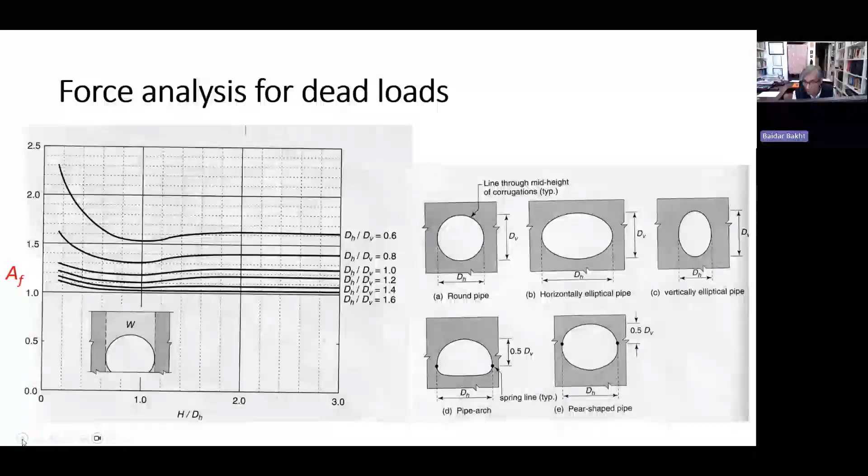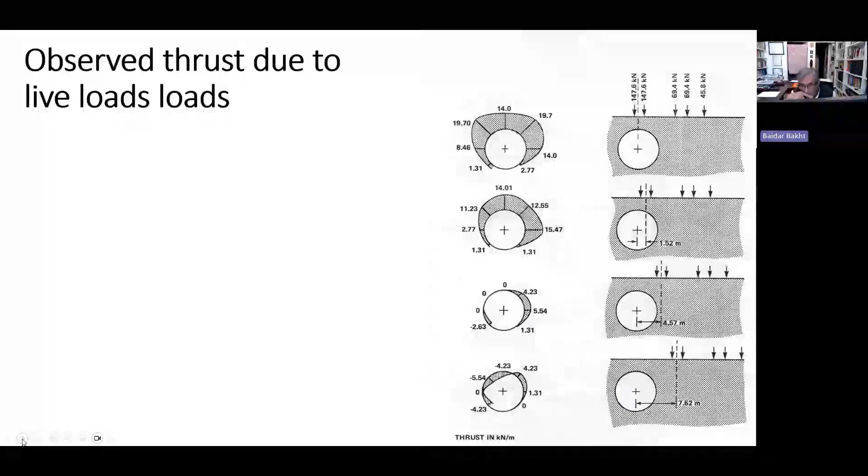This is the result from one of the tests we conducted at MTO using their test vehicle. You see, when we apply the live load to the top, the thrust due to live load is mostly limited to the upper portion of the pipe, and the lower portions of the pipe hardly see any effect of live loads. So now, strength analysis.

So now you have a curved bar subjected to thrust coming from dead load and live load and supported by spring supports, which is provided by backfill. So now suddenly soil, which was just a filling material, becomes an important structural component.

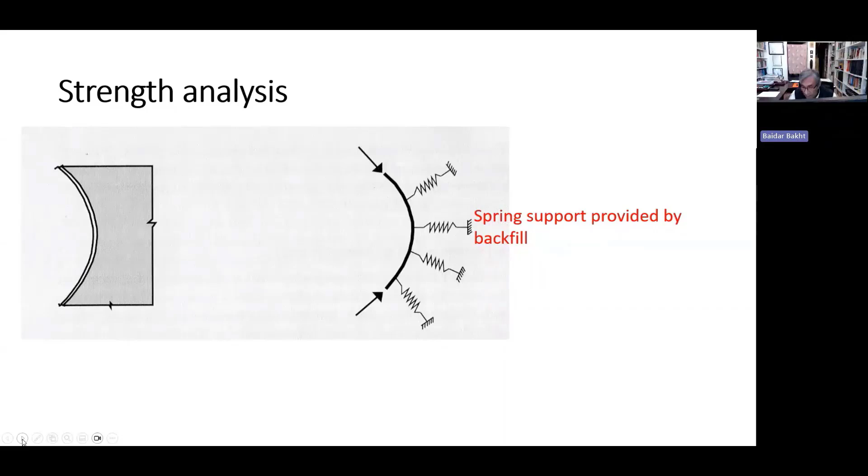The strength analysis, which is the buckling strength of the conduit wall, is inversely proportional to the radius of curvature of the pipe. If you take sandy soils, the modulus of subgrade reaction is high. If you compact the soil very well, it will be as high as 30 MPa. But if you compact it slightly lightly, it will be as low as 6 MPa.

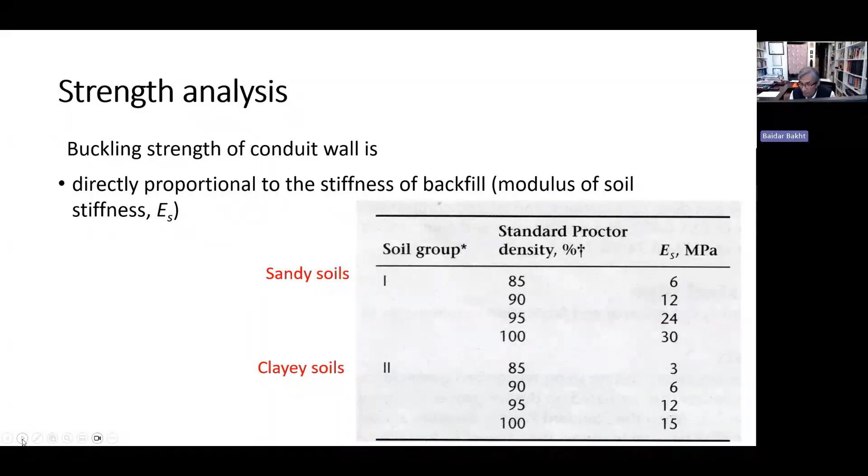On the other hand, if you take clay soils, their modulus of soil stiffness is roughly half of that of sandy soils. So the code requires you to have sandy soils as the soils for soil steel bridges.

In 1988, Akhilesh Agarwal and I conducted a survey of distress in soil steel bridges. Before I go into distress, I must say that soil steel bridges are much cheaper than conventional bridges, but they are also prone to distress.

The distress in pipe arches was either in the form of bolt hole tears or in the form of crimping, as shown in the left-hand slide. This is coming because the radial pressure at the haunches is very large in pipe arches, so they tend to bend more. And if you bend that plate, it will either crimp or develop bolt hole tears.

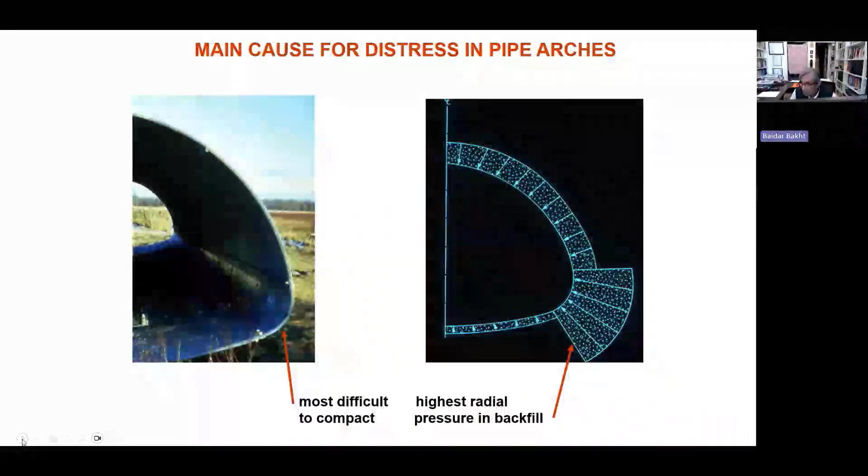To get rid of the bolt hole tears, the bridge code developed a scheme for bolting. The scheme is that you always have 2 bolts at a seam, and the bolt nearest to the visible edge should always be in the crest rather than in the valley. You see here the bolt nearest to the visible edge on the valley of the corrugation rather than the crest.

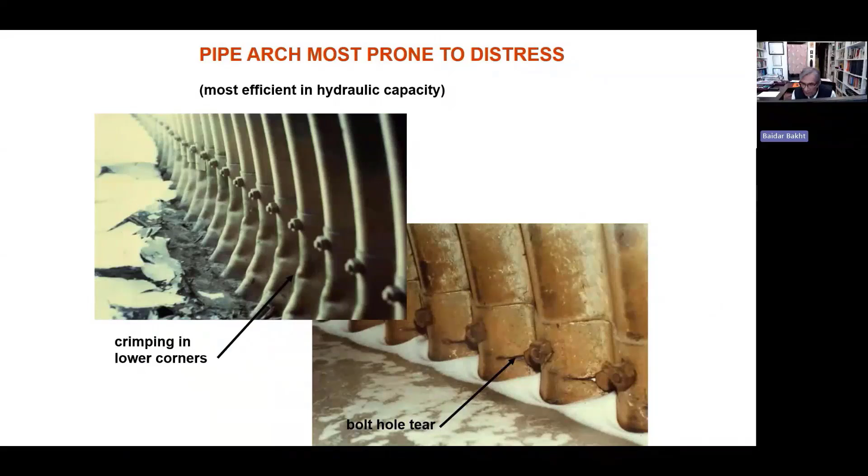The Ontario Bridge Design Code has construction provisions for only one kind of bridge, and that is soil steel bridges. It tells you how to compact the soil. You have the pipe, and then you raise the soil slowly on the two sides of the pipe in layers of about 10 to 12 inches thick, compacting them very well, using a well-graded sandy soil properly.

And if you construct that soil steel structure properly, it will have no difficulty. But if you make mistakes in construction, you will have the kind of troubles that we just showed you. The pipe arches, if they are sitting on weak foundations and they have large vertical pressure, the corners will deform.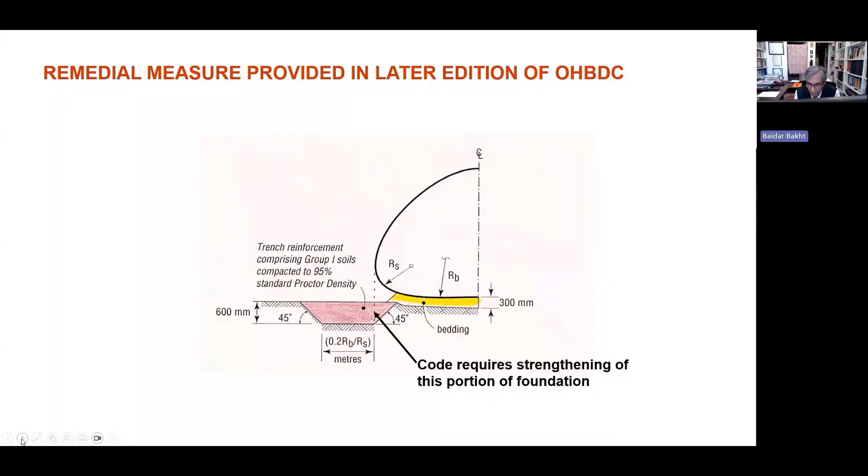So the later editions of the code are saying that if you have weak soil, then you should have a trench on each side of the pipe arch made of either concrete or well compacted granular soil. Here you see a structure pipe arch with concreted haunches, and the structure never gave any trouble.

The Canadian Society for Civil Engineering developed a technical committee on soil steel bridges. The chair of that committee was George Abdul Said, and in 1994 that committee wrote a book, Soil Steel Bridges: Design and Construction. It has many chapters dealing with various aspects of how to fabricate the shell. You see, the shell is so flimsy that if you reduce it to the size of a soup can, you won't be able to handle it. It will crumble into your hand.

So this book, also published by McGraw-Hill, was written by members of that CSCE technical committee. George Abdel-Sayed, I, and Leslie Jaeger had the pleasure of editing this book. And all the things that I've talked about are in this book, which was, until recently, the only textbook on soil steel bridges.

The Ontario Bridge Design Code is limited to soil steel bridges made of 6-inch by 2-inch corrugations. After that, the corrugations have become deeper, and because they become deeper, bending moments have now become important. Here you can see a structure of a span of 24 meters. That's mind-boggling, being made by these deeper corrugations. The CHBDC, the code after the Ontario Code, has design provisions for structures made with these deeper corrugations.

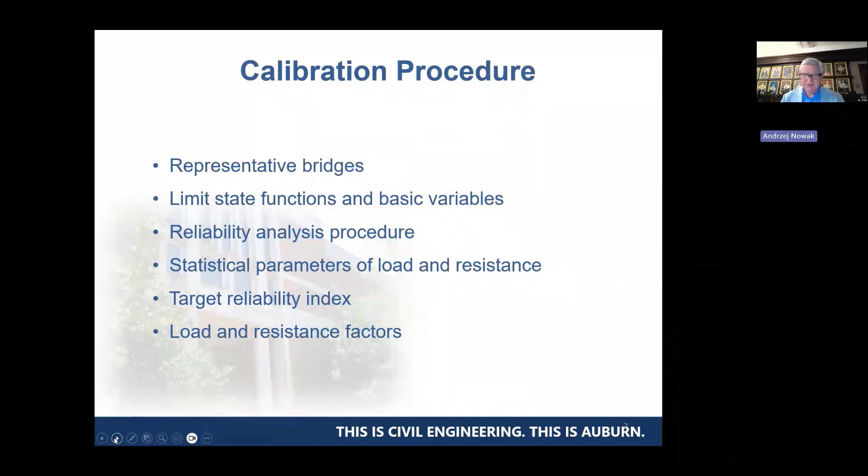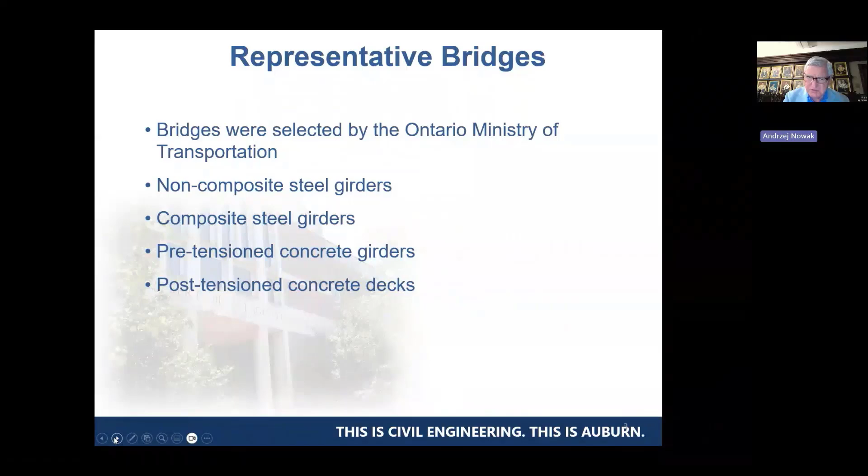The representative bridges were selected by the Ontario Ministry of Transportation, and the engineers from the ministry provided us with a large number of structures, trying to have variety, but at the same time being realistic as to how many different structures we could consider. So we considered the following categories: non-composite steel girders, composite steel girders, pre-tensioned concrete girders, and post-tensioned concrete decks. So these were the four types.

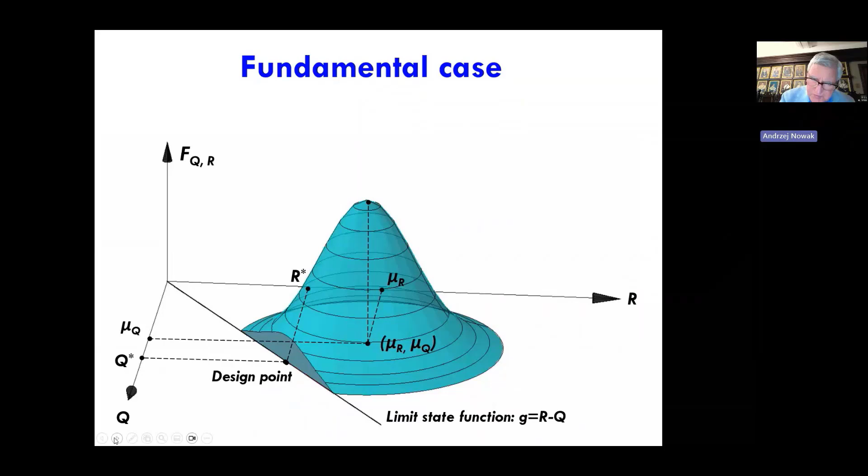We are interested, of course, in having that volume as small as is required. That's number one. But we are also interested in knowing what would be the most likely value of resistance and the most likely value of the load if the structure is to fail. In the theory of reliability of structures, we refer to that point as the design point. So we had to calculate that volume of what we cut off and the parameters of the design point. So we were to formulate limit state functions.

The simplest form of a limit state function is G equals resistance minus the load. If we make it equal to 0, R and Q are random variables, then we have G, which represents a straight line. The safety margin can also be considered as the ratio of resistance divided by the load. As long as it is larger than or equal to 1, then it's okay. If it's less than 1, it's not good. And the same with the first equation: if G is negative, that is a failure.

Now, in our case, in the Ontario Highway Bridge Design Code, we were considering a load which had several components. We considered dead load of factory-made precast steel components, where it was assumed that the accuracy of determining it is quite high. Then we considered another component of dead load, which represented reinforced concrete cast-in-place components. And the third one was the wearing surface, typically asphalt or some other wearing surface, which is subject to uncertainties because of additional layers added during the operation of the bridge.

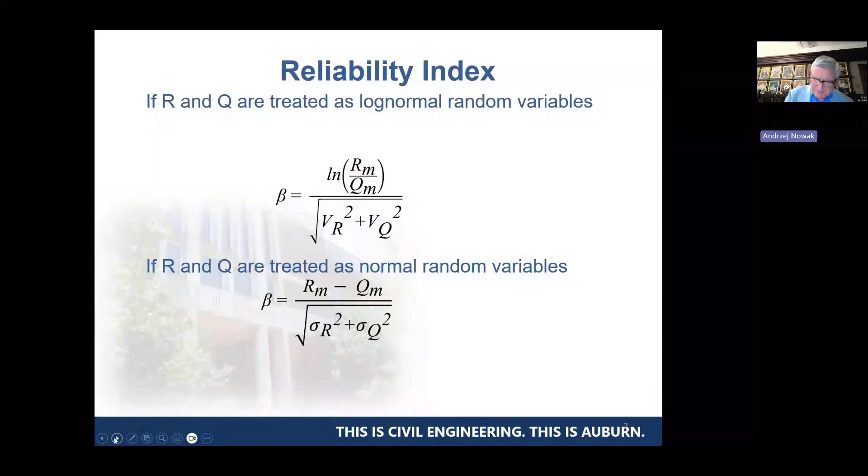If the limit state function was linear, R minus Q, then the reliability index can be calculated using the formula shown below: the mean resistance minus mean load, divided by the square root of the standard deviation of resistance squared plus the standard deviation of load squared. These equations, from the theoretical point of view, are absolutely perfect. The first one if both R and Q are lognormally distributed, and the second equation is perfectly correct if both variables are normally distributed. When they are not normal or lognormal, the formulas provide only approximate values.

Statistical parameters. A lot of these values were simply not available at that time. Today we have them, but in development of the Ontario Highway Bridge Design Code, we were really exploring a virgin area. The most important parameters which describe each random variable statistically are the mean value and standard deviation, but we would prefer non-dimensional parameters such as the bias factor, which is the ratio of mean to nominal, and the coefficient of variation, which is the ratio of standard deviation to the mean.

So for dead load, for the weight of factory-made components, the bias factor assumed is 1.03 and coefficient of variation 0.04. For cast-in-place concrete, bias factor 1.05 and coefficient of variation 0.08. And for the wearing surface, we assume that the bias factor is 1.1, coefficient of variation 20%, 0.2. Why am I reading these numbers? This is very important.

Why is it important? Because the Ontario Highway Bridge Design Code development named these values for the first time, and after that, all those doing reliability analysis of bridges were just following these numbers. They were taking these numbers and referring to the Ontario Highway Bridge Design Code. And the interesting thing was that these numbers were actually provided by Ministry of Transportation engineers who did some analysis, and they gave us these numbers to use.

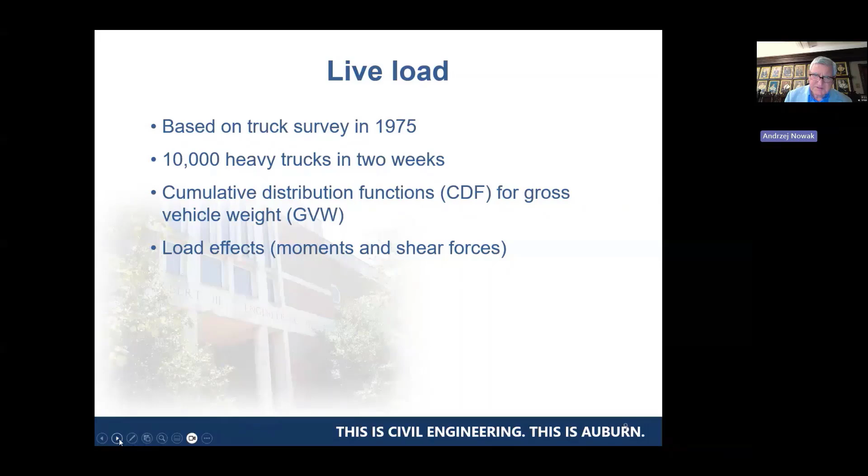There was a question of what live load we should consider: annual maximum, 5-year maximum, or 10-year? It was agreed to consider the 50-year maximum live load. Our survey was done within a period of 2 weeks, so how were we going to extrapolate this result to represent the 50-year mean maximum, and get the coefficient of variation for the 50-year maximum? That required statistical extrapolation methods.

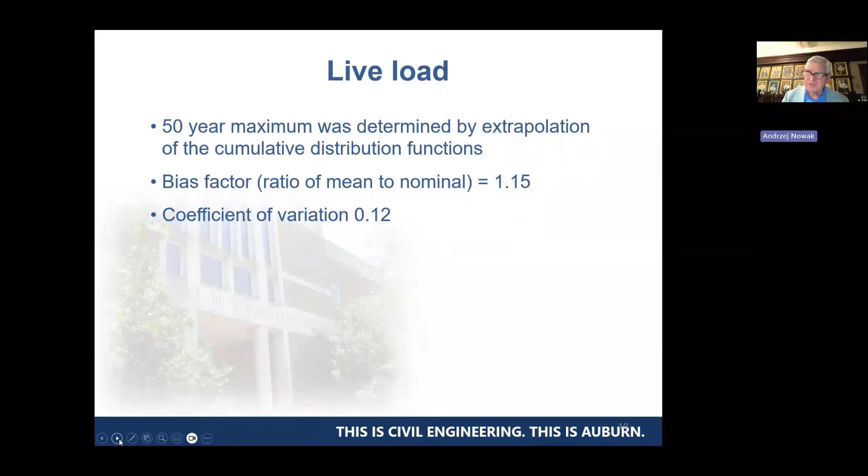We did this, and again, these considerations involved a number of researchers and led to first-time developments of these numbers. It was assumed that the bias factor, the ratio of mean to nominal, is 1.15 and the coefficient of variation is 12%. That was supplemented by the variation of dynamic load, so for live load plus dynamic load we ended up with a coefficient of variation of about 20%.

Dynamic load went through a number of cycles in the code. In early consideration of the code, there were attempts to relate the dynamic load factor to the dynamic properties of the bridge, the frequency of vibration, and so on. At one point it was 45% of live load, but later, when dynamic measurements were corrected, it went down to 10 to 20%, depending on whether there is a single vehicle or two vehicles side by side. The coefficient of variation was agreed to be assumed as 80%.

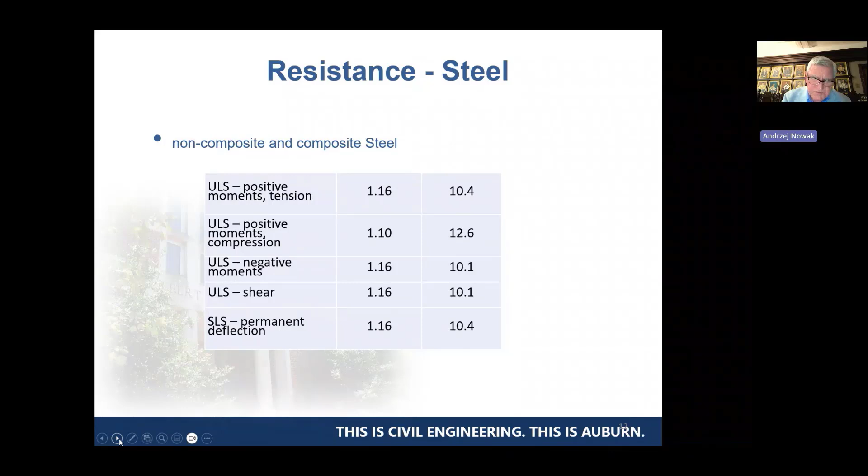Resistance was basically considered using the test results available at that time, some from the University of Minnesota, some Canadian data, some from Lehigh University. The considerations were for the material, the geometry and dimensions, and the model uncertainty in representing resistance. We considered a number of limit states: positive moment in tension, positive moment in compression, negative moment, shear force, and permanent deflection as the service limit state.

For resistance of steel girders, many of these numbers are still used, but a number of them have been verified and changed based on new data. The bias factors, as you can see here, for the ultimate limit state and the service limit state, and the coefficients of variation are given as percentages here.

This is the comparison of the calculated reliability indices as a function of the ratio of nominal resistance divided by nominal load. That is the traditional safety factor; the old allowable stress design was based on that consideration. So we calculated the reliability indices and plotted them, and considering that wide spectrum of reliability indices, it was decided to use the target value of 3.5.

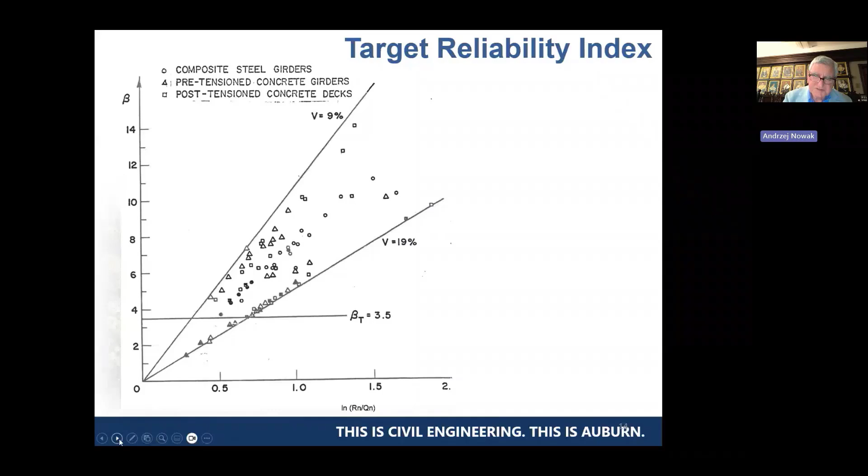It's interesting that this 3.5 survived many other attempts and considerations, and today the target reliability index for girders, even in ACI for buildings, is 3.5 for steel and concrete. So 3.5, a historical value, is still in service. As I mentioned, it was used in the Canadian Highway Bridge Design Code, and AASHTO also adopted it.

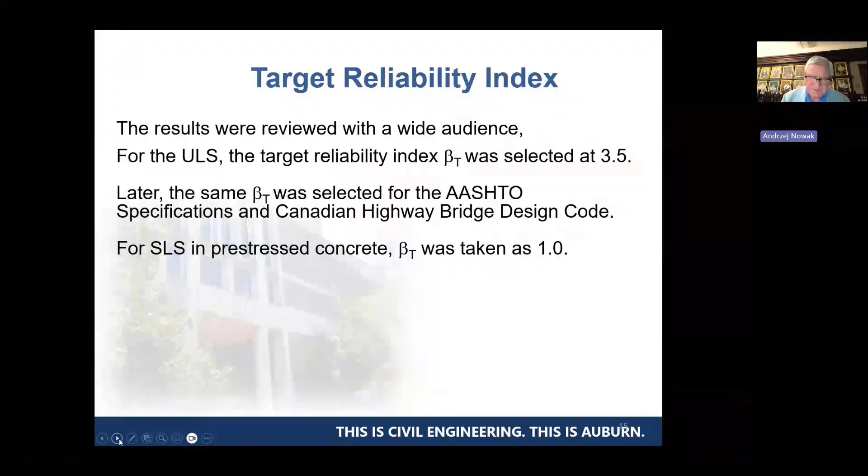There was more concern about service limit states, especially for prestressed concrete. In the calibration, it was taken as 1. Today, in some newer studies, for some service limit states, it is as low as 0. A very meaningful presentation of results.

Reliability indices were calculated for existing bridges provided by the Ministry of Transportation, using the nominal values available from the technical drawings and other sources. Then we calculated what these bridges would be if they were redesigned by the Ontario Highway Bridge Design Code, what the resistance and load would be, and consequently the reliability index using the statistical parameters I presented earlier, if the same bridge was designed to satisfy the new Ontario Highway Bridge Design Code.

And if you look at this graph, it really well summarizes the advantage of the new code. There is a wide spread of reliability indices from smaller than 2 all the way to 12 or 14, while the new design provisions provide a very narrow scope of reliability indices.

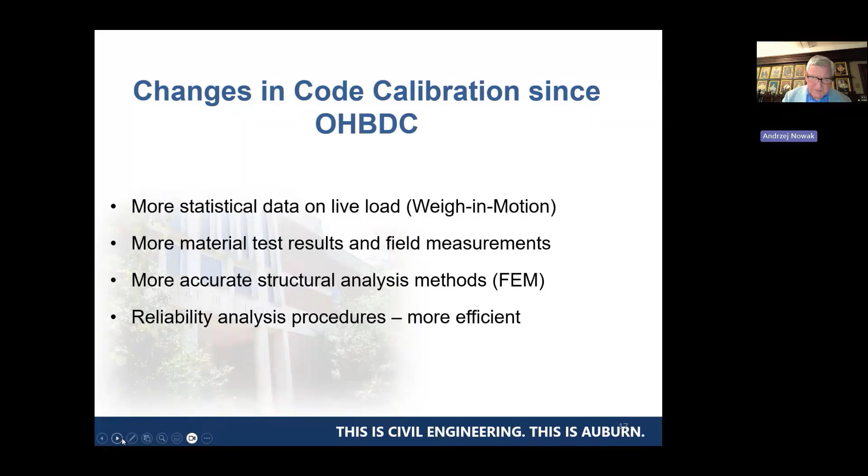I would stress that the Ontario Highway Bridge Design Code, as a pioneering program, made great contributions because it served as a basis for a number of other major codes, not to mention the Canadian Highway Bridge Design Code, but AASHTO. The AASHTO LRFD code is very much based, in particular its statistical parameters of load and resistance, to a large extent on the Ontario code.

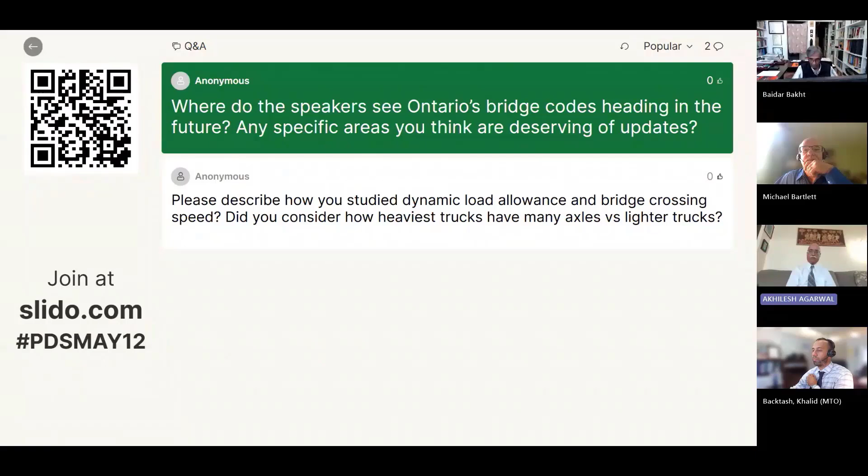And our next, we have two last questions here. Where do the speakers see Ontario's bridge codes heading in the future? Any specific areas you think are deserving of updates? Well, as we all know, the Ontario Bridge Code has already been absorbed into the Canadian Highway Bridge Design Code, which is supported by all the provinces in Canada, and it's an excellent document.

Going forward, I think the big thing that's on the horizon, it's here now, is structural health monitoring. And currently the evaluation provisions in the CHBDC don't really address structural health monitoring, and I think that would be an important addition. Particularly major bridges are now being constructed with all kinds of sensors to be able to be monitored, and we need to think about how we're going to verify and use that information.

Thank you very much. Please describe how you studied dynamic load allowance and bridge crossing speed. Did you consider how heaviest trucks have many axles versus lighter trucks? Yes, these have been considered. Heaviest trucks would have a heavier load, but somewhat lower dynamic load compared to lighter trucks. Also, if you have more axles in the truck, all the axles are not in harmony. They do not provide the maximum dynamic load simultaneously.